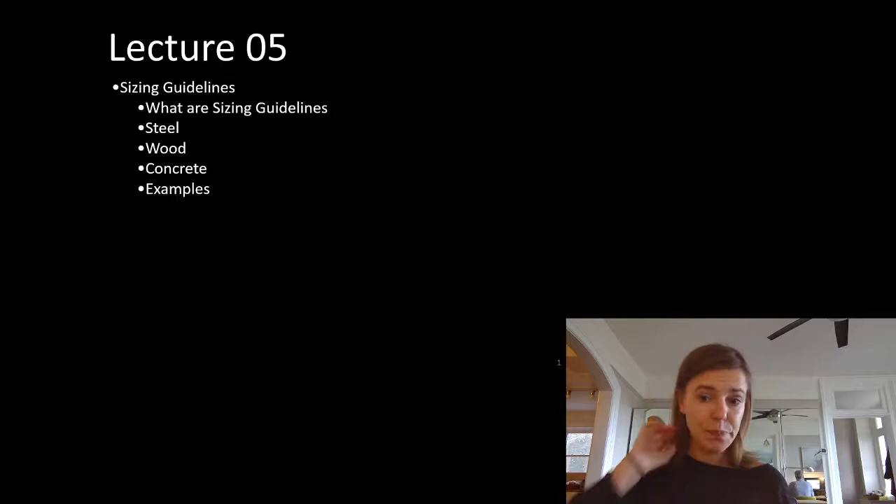This week we're using sizing guidelines. You might hear people refer to them as rules of thumb—that's what most engineers call them, that's what the industry calls them. One year I had students write in a review that I supported domestic abuse because I called them rules of thumb, since they'd heard that term meant something explicit. That is not true—it's an urban legend not substantiated in fact in any way. That said, it made me cry, so rather than deal with that every year, I decided to just call them sizing guidelines. The difficulty is you're going to hear everyone else in the industry call them rules of thumb, so I can't gloss over that fact, but we will refer to them as sizing guidelines here.

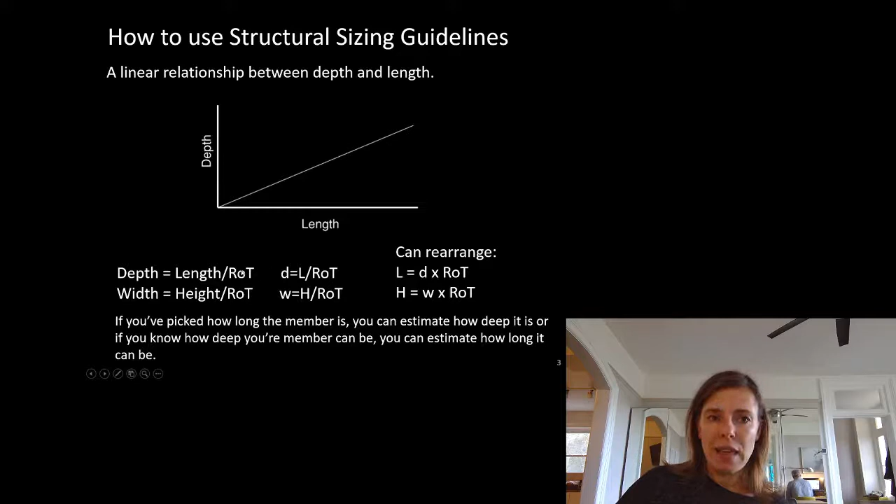We're going to calculate next term that it's not a linear relationship between depth and length. But for our sizing guidelines, it lets us put something on with very quick calculations without having to go through in-depth structural analysis. The idea is that if you know the length of your member or beam, you'll be given a rule of thumb or sizing guideline—you'll see me often write ROT as a placeholder. You take the length, divide it by your sizing guideline, and it tells you the approximate depth that would be good for that beam.

That means you can rearrange that. If you know you have a maximum ceiling height that you can fit your beam into, you can figure out the maximum length your beam could possibly be based on very preliminary information. For width, that's the height of the element divided by the sizing guideline—this would be for columns and walls. Thinking about it in the opposite way, if you know what the width is, say you could only have a 290 block wall, you could multiply it by your sizing guideline and figure out the maximum height that thing could be.

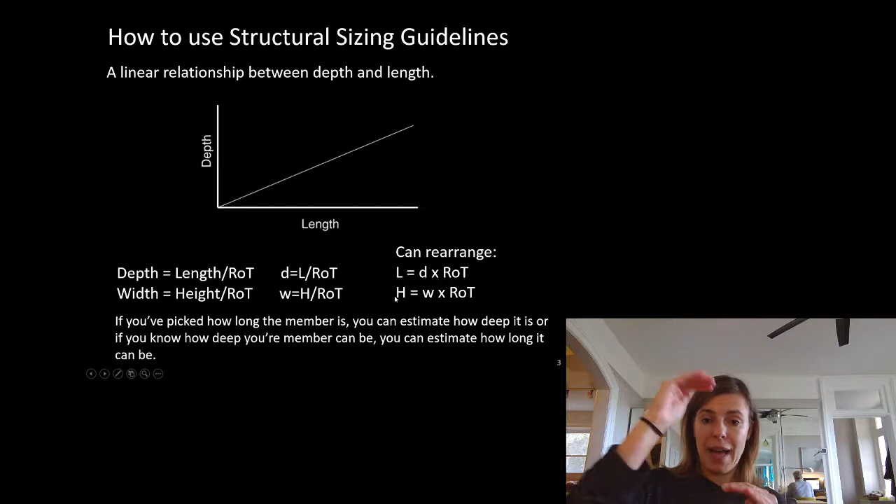So if you've picked how long the member is based on your layout, you can estimate how deep it needs to be. If you know how deep your member can be because you have a limited ceiling height, you can estimate how long it can be.

So when can you use your sizing guidelines? Well, they'll be close to the final design member when they're within the range of normal applications. This assumes things are relatively standard—if you're talking about a steel building, you're talking about a relatively normal steel building. If you're talking about a wood house, a relatively normal wood house. If you're talking about a concrete building, a relatively normal condo or office building.

These might not be the estimates for you if you have really large loads, or if you're spanning extra long distances. Remember, next term we're going to prove it's not a linear relationship between depth and length. If we're assuming it is, when we get into extra long lengths, these sizing guidelines might not be good enough for us.

If you're using a weird layout, something different than what you'd see in a standard layout, that could have an implication on these sizing guidelines. If you have large transfers—something big coming down a whole building and then it stops and has a transfer—that could make a change.

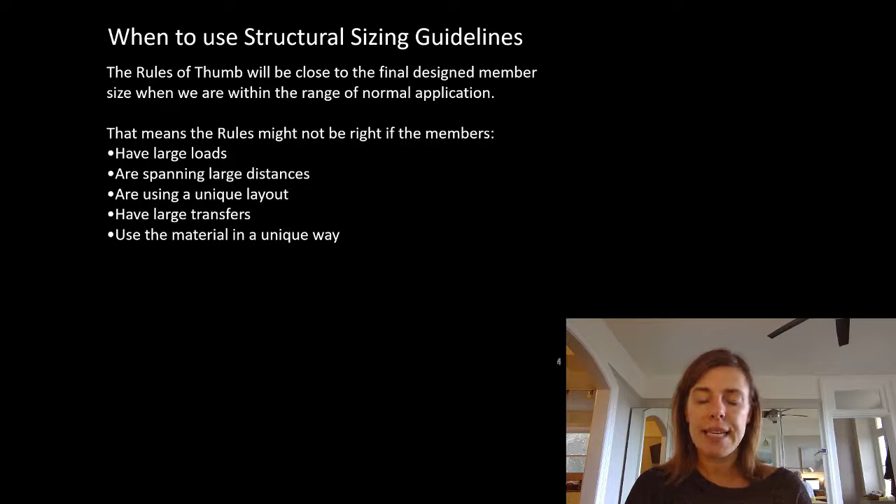If you go into your downloads or helpful downloads module, you will find a file called sizing guidelines. In that, there is a separate page specifically for mass timber.

So as we introduce each one, I'm going to remind you what each thing kind of looks like. We've already talked about these materials, so you have a good idea. I'll also usually provide you with what is kind of the normal range of products of that material.

Sorry, I'm freezing. I'm just going to grab a blanket and put it on my lap here.

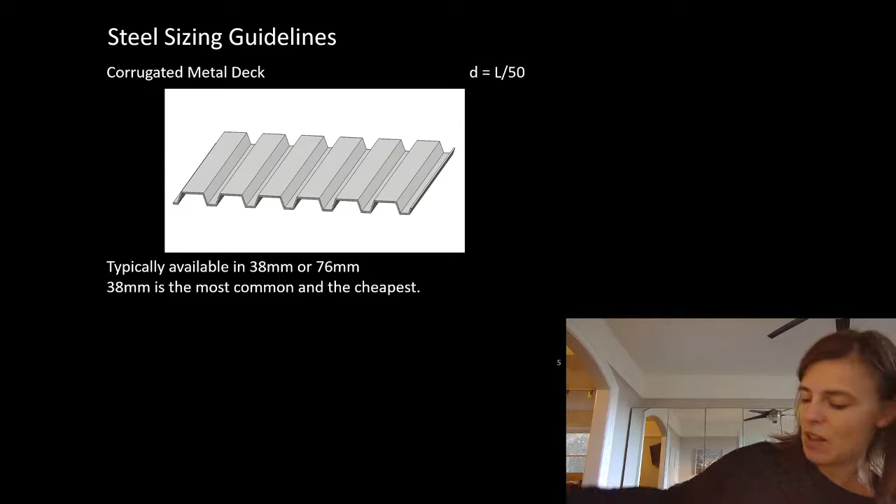So the first one we're going to talk about is corrugated metal deck. Remember, our corrugated metal deck spans from joist to joist, or purlin to purlin, or purlin to joist. But it is spanning a relatively short distance, and it is our surface. It is what provides our enclosure, essentially.

We will put our roofing or our floor on it. If it's metal deck, it's probably roofing. Maybe if it's a house, they might do plywood on top of the metal deck and do the roofing that way. If it's a floor, they might put plywood on it and do a floor that way. But normally if it's a floor, it's concrete on metal deck.

So the sizing guideline for corrugated metal deck, which we often just call metal deck, the depth based on the sizing guideline is the length it's spanning divided by 50. Now this is talking about how far apart the supports are. A piece of metal deck can come in a very long strip, but what we're talking about is how far it spans. And it only spans a relatively short distance because we've got joists or purlins at some regular spacing picking up that metal deck. Typically, it's available in...

It's typically available in 38 millimeters or 76 millimeters deep. It is most common to use 38 millimeters. I often see, when we get into the projects in second term for studio, students again and again picking 76 millimeter metal deck for no reason that I can figure out. I can't see the reason why.

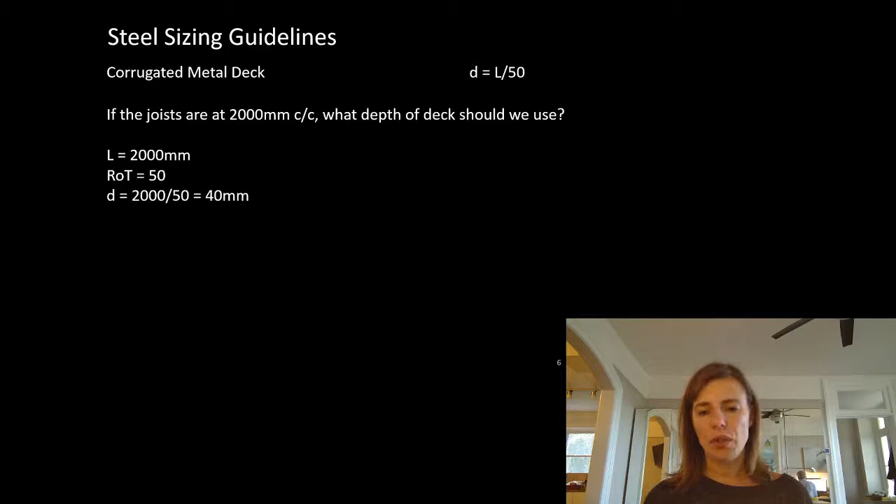So if our joists or purlins are at 2 meters on center, what depth deck should we use? Well, we know our sizing guideline is L divided by 50, and since our deck is spanning from joist to joist and they're 2 meters apart, the length our deck is spanning is 2 meters. So our depth will be 2,000 divided by 50, which works out to 40 millimeters—pretty darn close to 38 millimeters. I would always say don't round down, but 2 millimeters in this instance, we can use our 38 metal deck. So we would probably put 38 metal deck on our drawings for this.

So the deck comes in 38 and 76, which I already said. The 38 is very close to 40 millimeters, so we should use the 38 millimeter corrugated deck most of the time. This, of course, means that whatever supports the deck would often be 2 meters apart at a maximum. So if you know that 38 metal deck is the cheapest system for your entire building, that means whatever supports it is going to want to be every 2 meters.

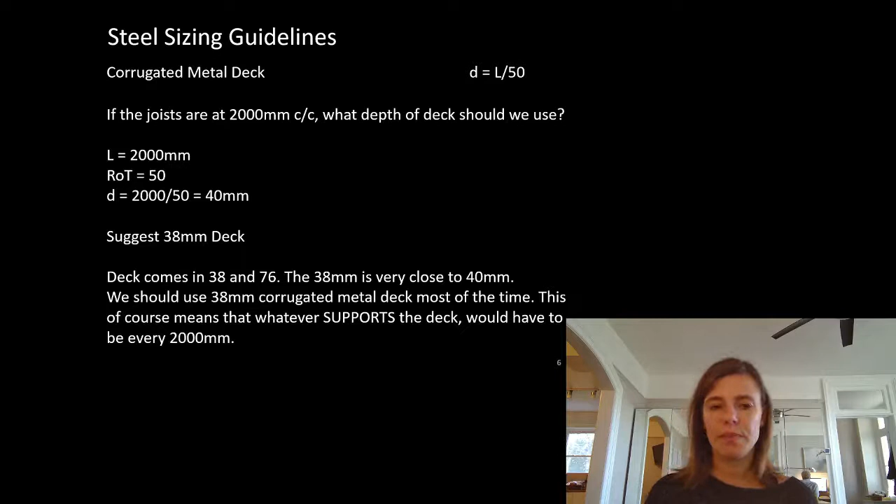The sizing guideline is depth equals length divided by 20. Again, length here is how far the deck is spanning. The most common assembly for our concrete on metal deck is 64 millimeters of concrete on 38 millimeters of metal deck. This is using normal density concrete.

The only reason I'm saying that so explicitly is because when you look at the dead load list, it has ND written for the concrete, but that's saying normal density. Normal means it's the normal thing to do, and it is what's done the majority of the time. So 64 concrete on 38 metal deck - this does not mean what you might think. I'll show you exactly what that means.

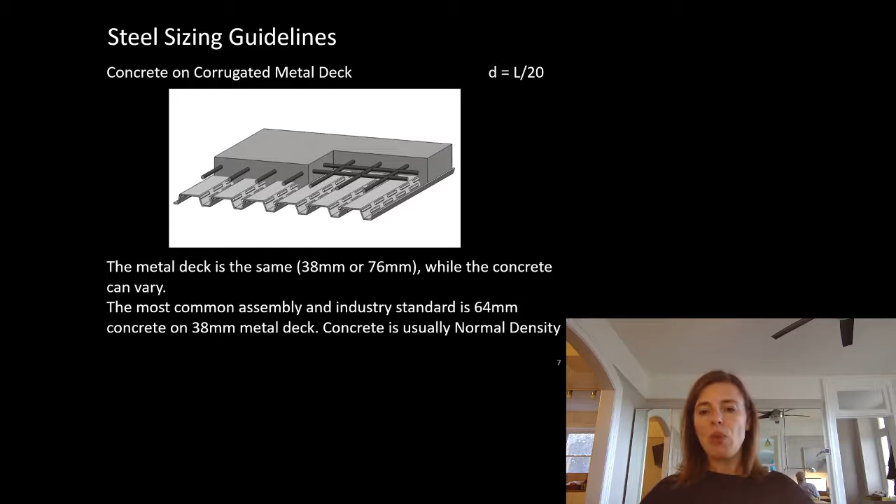This is where, when we start talking about dead loads next week, don't start from basic principles and try to figure out the volume of the concrete. You will be given how much that weighs. So don't worry about that next week. You'll be given that information, but you don't need to go calculate the volume of concrete for this.

So if our joists are at 2 meters center to center, what depth of concrete on metal deck should we use? Well, 2,000 divided by 20 equals 100 millimeters, which is pretty darn close to our 102 millimeters for our 64 concrete on 38 metal deck.

So why would the concrete on metal deck span the same distance as the metal deck? The concrete on metal deck should be much stronger. Why would we span them the same distance? Well, this is where knowing what the application is is really important. The flooring usually has a higher cumulative load on it than the roof. The roof, with its lower load, can have the weaker material spanning the exact same distance as the higher load on the stronger material. So they would work out to be able to span the same distance.

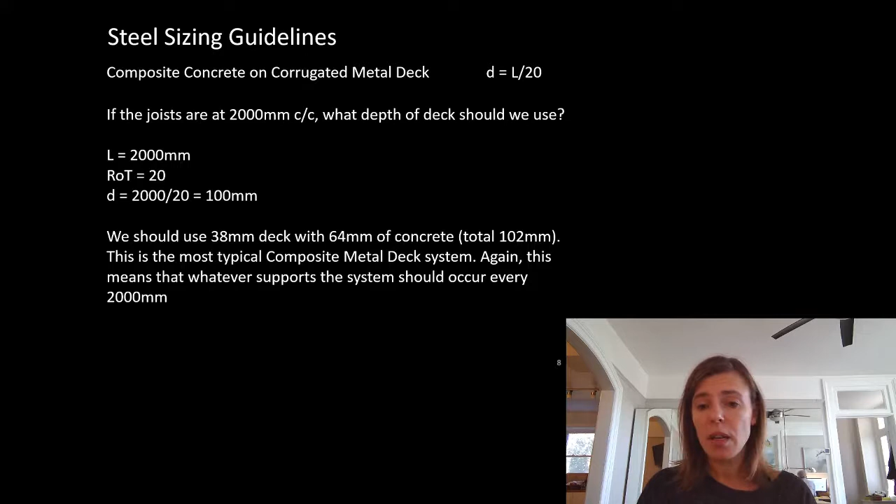So again, if 102 millimeters is our most common assembly, 102 times 20 gives us about 2 meters, which is a pretty darn good system for our joists. 2 meters or less for concrete on metal deck or metal deck is where our joists or purlins need to be. That's just ubiquitous - 2 meters or less. That's where you're going to start. That's what you're going to draw again and again and again.

So our open web steel joists - these are the things that are picking up our metal deck or our concrete on metal deck. Now, we've already said that what's normal is for our deck to span 2 meters. Doesn't matter if it's concrete on metal deck or metal deck, it's spanning 2 meters. Our joists then need to be at every 2 meters or less. That is going to be the standard.

There are definitely going to be instances where that is not the case. For sure it is. But we're talking about the normal boring stuff, and the normal boring stuff, they're going to be every 2 meters.

They typically come in 2-inch increments. We're going to work in metric and say 50 millimeter increments. So if I ask you how deep an open web steel joist should be for a particular length, I don't want the exact calculation - I want the exact calculation rounded up to the next nearest 50 millimeters.

So if your calculation is 380 millimeters, I want 400. If you went down to 350 millimeters, you're giving me something shallower than the minimum recommended depth. You wouldn't want to do that. You could in the final design make that call, but you wouldn't want to do that right now and then get a nasty surprise when the engineer comes in and does the final design and says, whoa, whoa, whoa, you need a 400 millimeter deep open web steel joist. You haven't left yourself room for that. Now you're going to have deeper ceilings than what you've drawn.

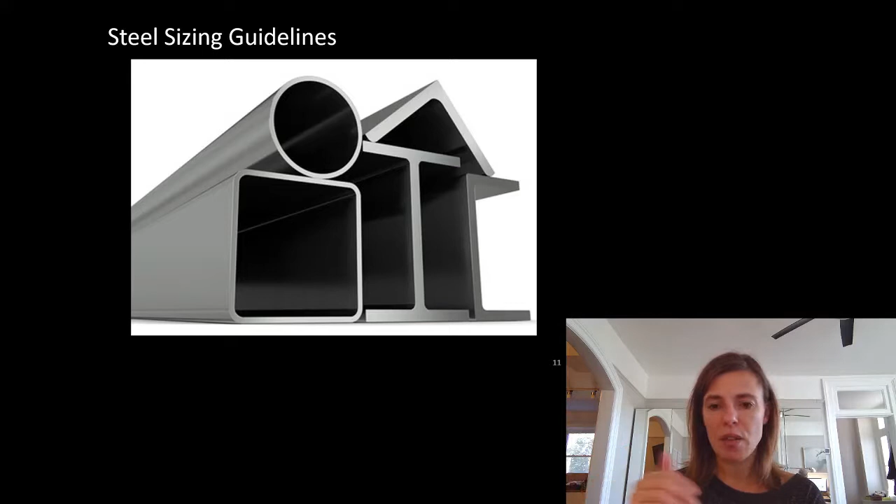So here are normal sizes that are available in these sections. A W section would be W and then something suggesting the depth. Now, the depths are not exact - these are not the exact final depth of these members. A W410 is not exactly 410 millimeters deep. But since our sizing guidelines are kind of approximate, it's a pretty good place to start with our drawings.

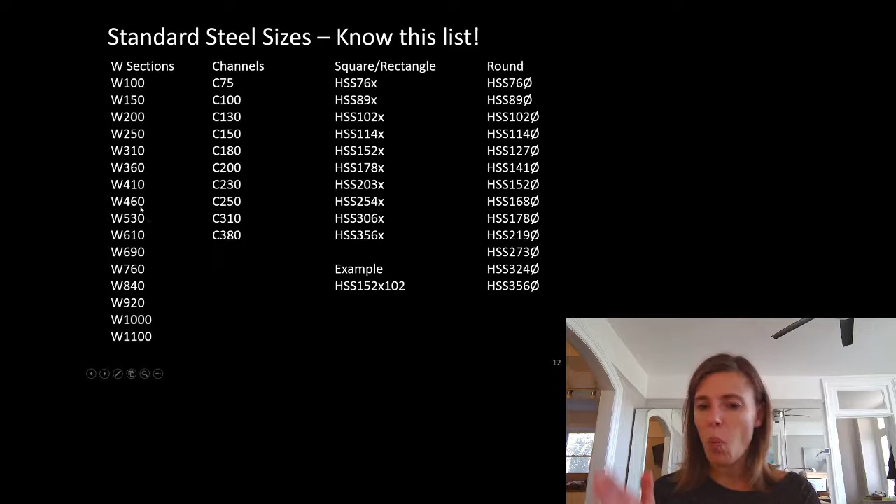Channels, same thing, approximate depth. If you look them up in the code, you will see that there's another number here. It would be W100 by 19, for example. That second number would be the weight per linear meter of the element. We're going to talk about that next term. Channels, same thing - the second number would be the weight. So you could tell at a glance, comparatively, how much they weigh. And weight is our direct association with cost.

HSSs, which are elements that we take flat steel and kind of fold them or roll them into the shape we want, not heat it up to make the shape we want. They give us exact dimensions, but they don't tell us anything about the weight. So it's not as obvious to tell at a glance what the relative cost is of these.

So do you remember when we talked about tributary areas and tributary widths? I talked a lot about the difference between a river and a brook and a creek, and how if you came across them in the woods, they're all rivers. It's only when we're trying to categorize them that there is any meaning associated with these things. That applies for us right now.

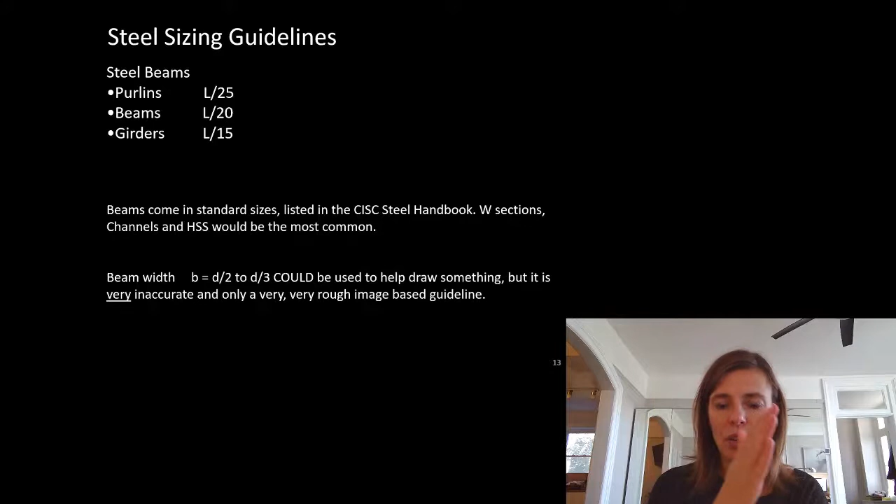Steel beams are steel beams. Whether we're calling them a purlin or a beam or a girder is to just help us in our mind figure out what their hierarchy is. A purlin is a beam that is not doing that much work. It is usually just picking up concrete on metal deck or metal deck, and it is usually at 2 meters on center. So it's a relatively lightly working element.

Our beams are usually the element that are picking up the purlins. So we wouldn't know the exact spacing of those because they'd be dependent on the length of our purlins. And then a girder is a beam that's doing an extra hard job.

We don't always know what that extra hard job is. Maybe we know that there's really high loads in that zone. Maybe it's picking up a transfer, whether it's supporting another beam or a column above.

I've had students in the past say, well, I sized it like a girder the way you said, but it was too deep of a beam for me, so I'm going to call it a beam. Well, the problem there is now you haven't left enough depth for your element. Calling it a purlin or a beam or a girder isn't going to change the final math in the design.

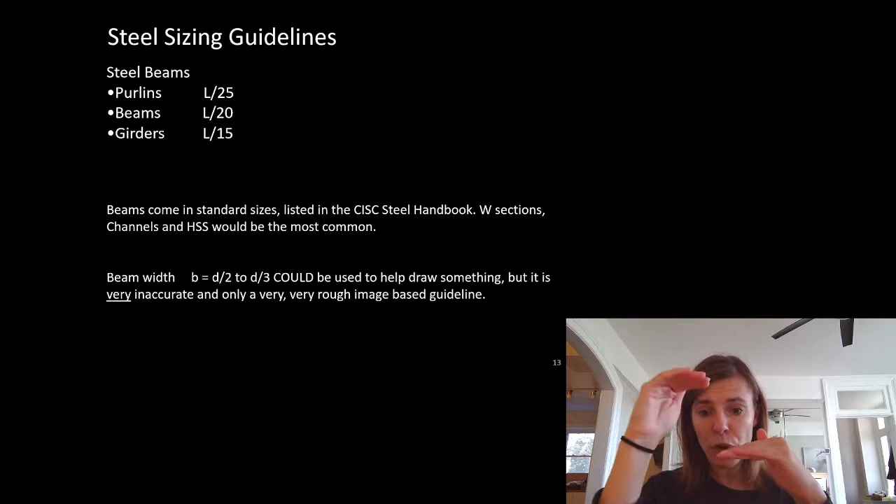And if you called what you can clearly recognize should be a girder a beam and sized it accordingly, you're going to end up with a beam that's not this deep, but this deep in your preliminary sizing. And then when you do your final design, you're going to find out that you do in fact need a beam this deep. And if you're telling your client you only need this much room, it's going to be a nasty surprise that you need more depth.

So always be conservative here. If you see a beam doing something weird, call it a girder. It's only going to give you a nice safe buffer in the end.

So our beams, and remember a beam is a purlin, a beam, or a girder, come in standard sizes listed in the CISC Steel Handbook. That list is the list that I showed you on the previous page. The W sections, the channels, and the HSSs would be the most common.

There is a sizing guideline chart that tells you a width of 1/2 to 1/3 of the depth could be used. I hate the width sizing guidelines because they're absolute crap. The width varies greatly even within depths of a particular type of beam, to the point that I'm not going to ask you a width for any of these things for our steel beams, just because they have almost no relationship the way some of the other beams might possibly have.

You don't need to worry about the width for the steel beam, but it might come in handy if you're not picking a real beam and you just want to draw something. Drawing it to 1/2 to 1/3 of the depth for the width, you'd probably have a pretty good drawing, but it would give you no kind of real information.

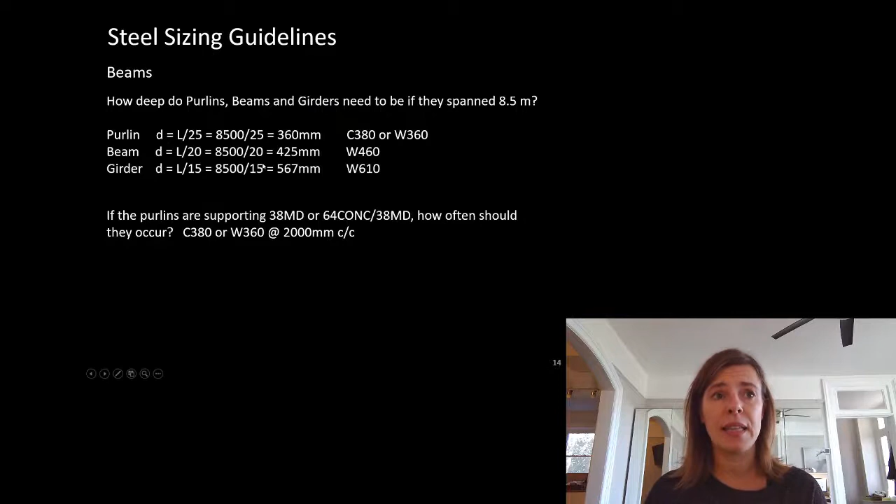The beam would probably be a girder, so we'd probably be comparing these trusses to a girder. If we looked at our girder sizing guidelines, it was L divided by 15. Our truss is going to be L divided by 12. So that means if they're both in the exact same spot, if we switch from a girder to a truss, it's going to be deeper, but it's deeper with all of these voids in it.

So these would be custom made by the fabricator. Often the base building engineer might get involved in the design of these, at least for a preliminary design—the fabricator would be designing the connections. These ones, you could very explicitly go to a custom depth. Like if the calculation needed to be 935 millimeters deep, we could make it 935 millimeters deep. If we had no real constraints though, we'd probably still kind of keep it to 50 millimeter increments.

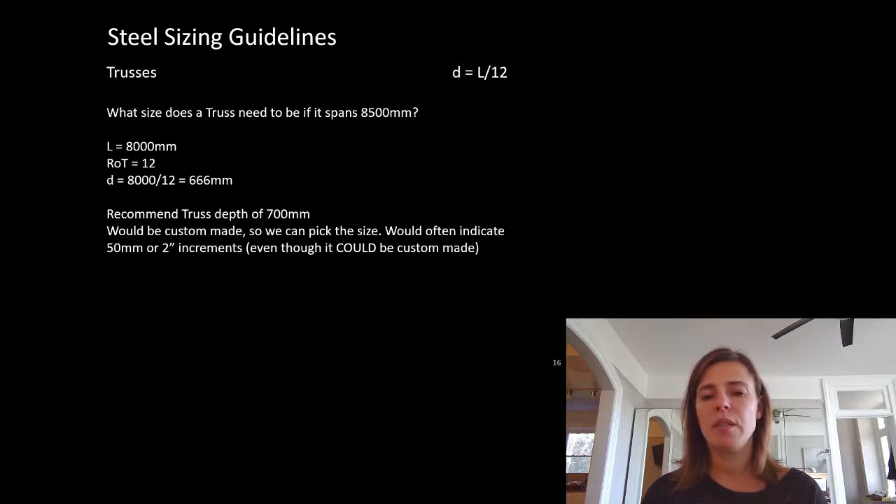So how deep would a truss need to be if it spans 8.5 meters? We'd take 8,000 divided by 12 and we get 666 millimeters deep. I'd probably recommend a 700 millimeter deep truss. If this was a very refined, high end, high profile design, we might later in the project look at refining it to something very specific. But at this point, I would probably round up to the nearest 2-inch increment, or 50 millimeter increment.

Let's talk about our columns. The sizing guideline for columns is H divided by 40 to H divided by 20. We're going to stick to the H divided by 20 rule here because we're talking mostly about short columns. The standard sizes are the same ones we'd be looking at—W sections, HSSs for this. We wouldn't use angles or channels for columns. So we'd be sticking to our round HSS, rectangular or square HSS, or our W section. We'd go back to that same list I showed you to pick from.

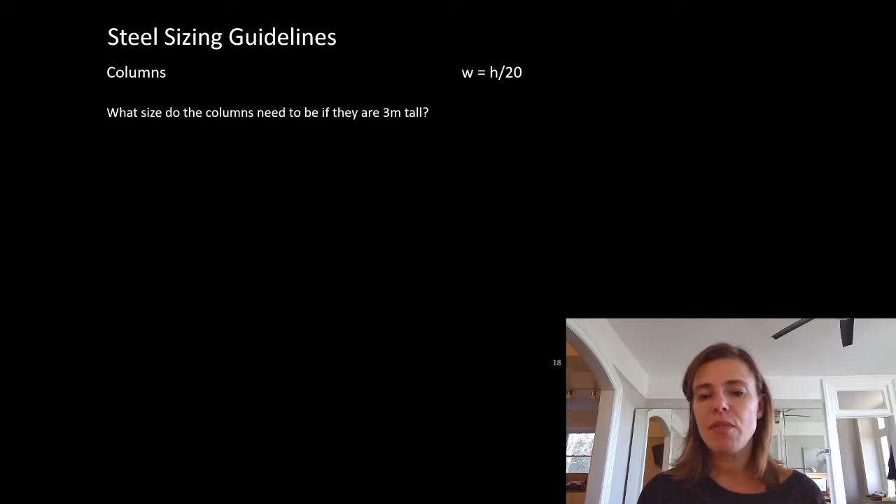So what size do the columns need to be if they're 3 meters tall? Well, this is a short column, and I've told you to stick to the H divided by 20 range, so it would be 3,000 divided by 20, or 150 millimeters. So if I was going to pick something for this, I would say a W150, or an HSS 152 by 152, or a round HSS that's 152 millimeters in diameter.

So we want to size the concrete on metal deck. They've told us that this second floor is a floor, in fact—the 2 is just context, usually that's the context for a second floor beam, second floor deck.

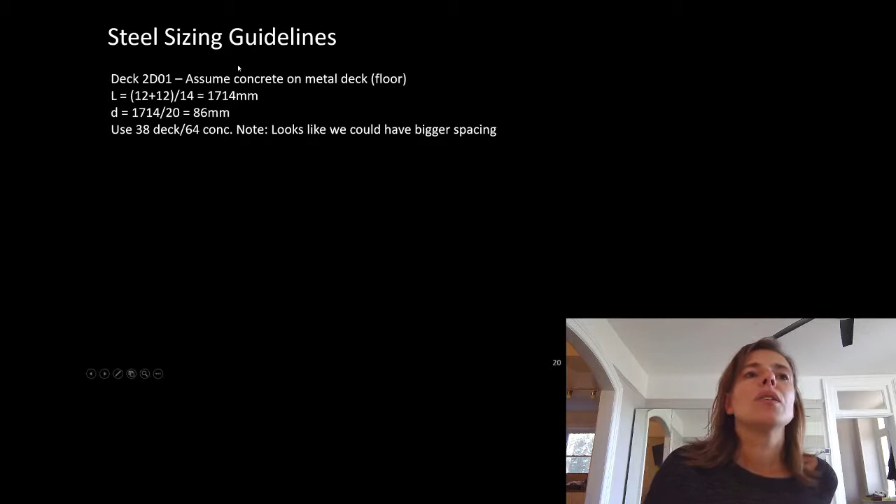24 divided by 13, let's fix that right now. I'm going to fix that while I'm talking to you guys, if my computer wants to behave. All right, let's take a look at this right now. This should be 13. 24, 1846 millimeters. 1846. One 846 divided by 20. All right, just wanted to fix that right now while I had it here.

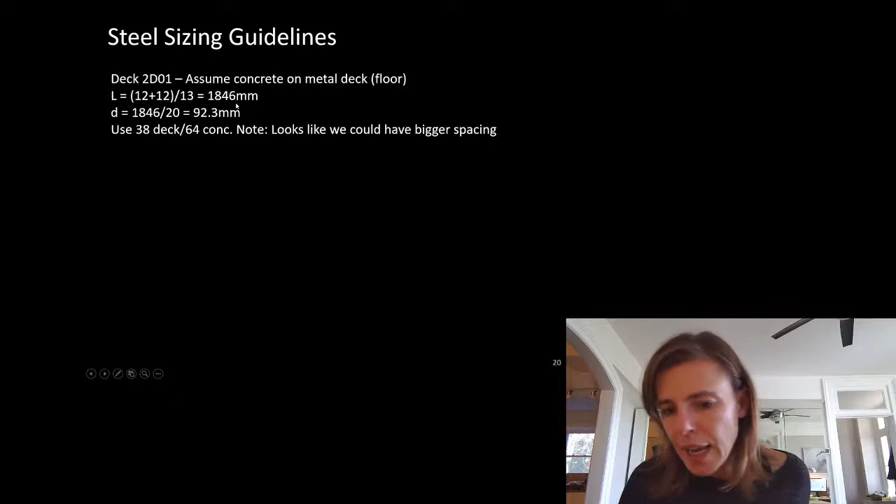So we saw that the full length of that was 24 meters, but there was a support every some distance, and there was 13 of those. So 24 divided by 13 gives us 1846. So that's how far our deck is spanning. It has a support every 1.846 meters. To figure out what depth we need, we have 1846 divided by 20, since the sizing guideline for concrete on metal deck is L divided by 20. We do that math and we get that we need something that is 92.3 millimeters deep. Well, 38 deck supporting 64 concrete, we know is industry standard.

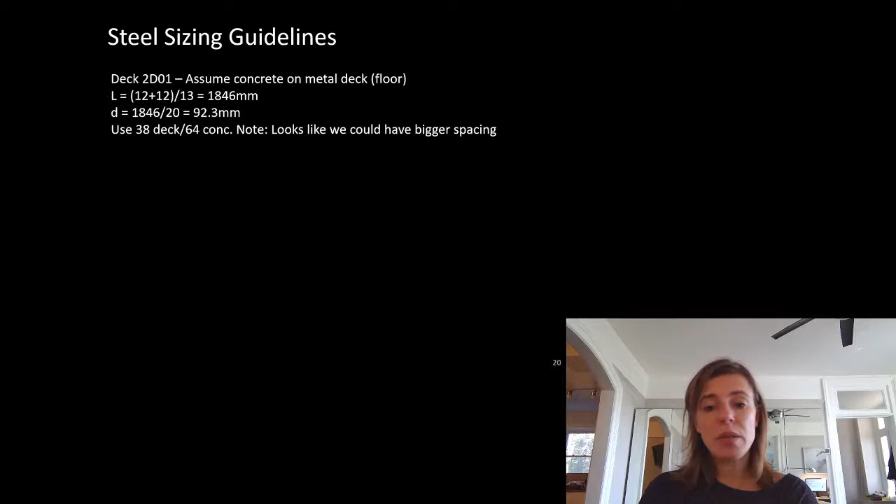It looks like maybe we could have spaced our joists a little bit more. Maybe we know something about this system, that there's heavier loads. I don't know, maybe this worked really well for the layout. But it works within our range, and it's pretty close. 102 is the total depth of our 38 deck, 64 concrete. So it seems like a really good choice.

Joist 2J01 was spanning 8 meters. So we have something that is 8 meters long. It is about 2 meters on center. It's actually 1.846 meters on center, but we know that's pretty close to our 2 meters on center. So it seems like our sizing guideline is still a good choice, it's not doing something weird. So we take our 8 meters and divide it by 16, giving us 500 millimeters. So it seems like a really good choice would be a 500 millimeter deep open web steel joist.

Okay, so 500 millimeter open web steel joist seems like a really good choice there.

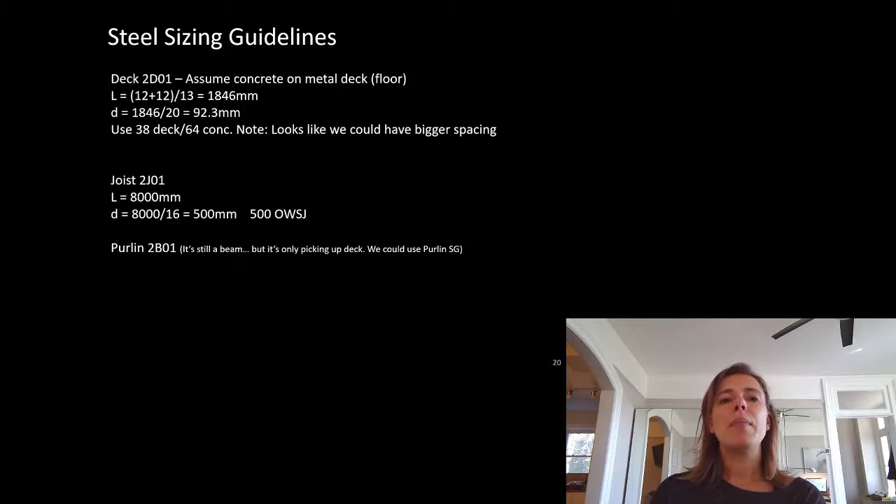Let's talk about purlin 2B01. It was at the exact same spacing as our joists. Remember, joists and purlins can be interchanged, they have different sizing guidelines, so you need to pay attention. A purlin is still a beam, so calling it 2B01 is totally normal, but looking at the plan, we can recognize that it is doing the job of a purlin, so we can be a little bit loose on our sizing guideline. We can go with the lighter criteria, the purlin one. It's only picking up deck, and it appears to be about every 2 meters. So our 8 meters divided by 25 is going to give us 320.

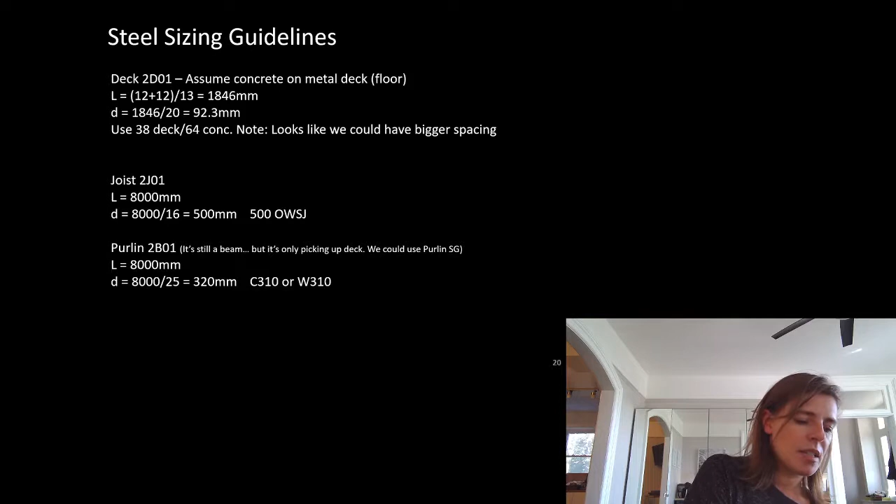I actually don't like this one, we're going to change this. 2B01, I'm going to change this to a C that works and a W that works. I had a different number here previously, so I'm going to fix this little typo right here, right now. Let's just go back and take a look at what we had here. We could have a C380 or we could have a W360. So I'm going to update that right now while I have the opportunity.

A good choice for our purlin would be a C380 or a W360, again at 2 meters on center. So for the same span, the purlin and the open web steel joists are shallower than the open web steel joist option, but they probably end up being a heavier system. So there's a payoff there. If you want the shallower system, go with the purlin, but understand that it might be a little more expensive.

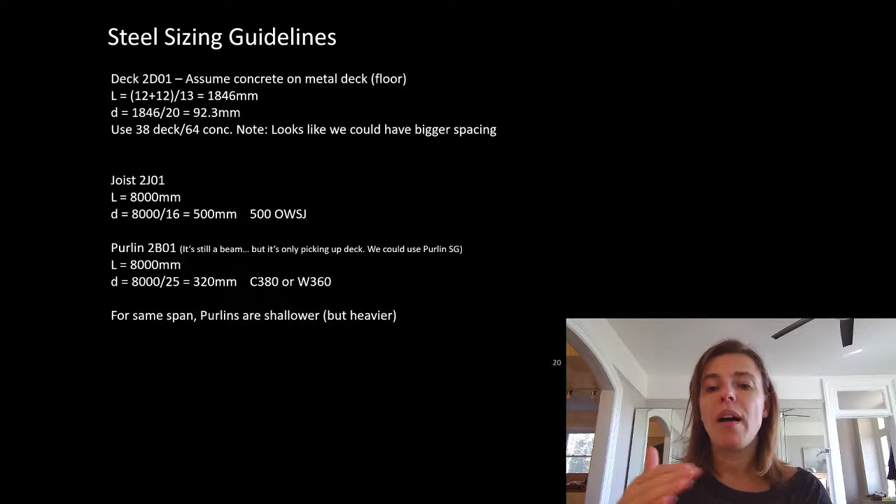Joists become cheap when you have a lot of them and they're repetitive. If you only have 3 or 4, the purlin is definitely the way to go.

So beam 2B02, that was our beam that spanned 12 meters and was picking up our purlins. That was the one spanning from C01 to C02 and C02 to C01. Our beam sizing guideline seems to be the appropriate choice because it is supporting purlins, which we've said is typically what a beam would do.

If we use the purlin sizing guideline, we'd get a shallower beam as our answer, and then we could get a nasty surprise when we go and do our final design to find out we should have guessed that there was a deeper member.

So our length is 12 meters. Yeah, 12 meters. Our sizing guideline is L divided by 20, or 12,000 divided by 20 gives us 600. So we should use something that's greater than 600 millimeters deep. If we go back and look at that list, a W610 seems like a really good choice.

If we had used the purlin sizing guideline, we would have gotten something shallower, and we would have been unpleasantly surprised in the design.

Now 2B03, we talked about already and said that it seems to be spanning a really far distance. Let's go ahead and call that one a girder. It's also got a transfer coming down on it. So something that seems to be doing an extra big job, we'll use the girder sizing guideline. Its full length was 24 meters or 24,000 millimeters. Our sizing guideline is 15, and we get that it needs to be 1,600.

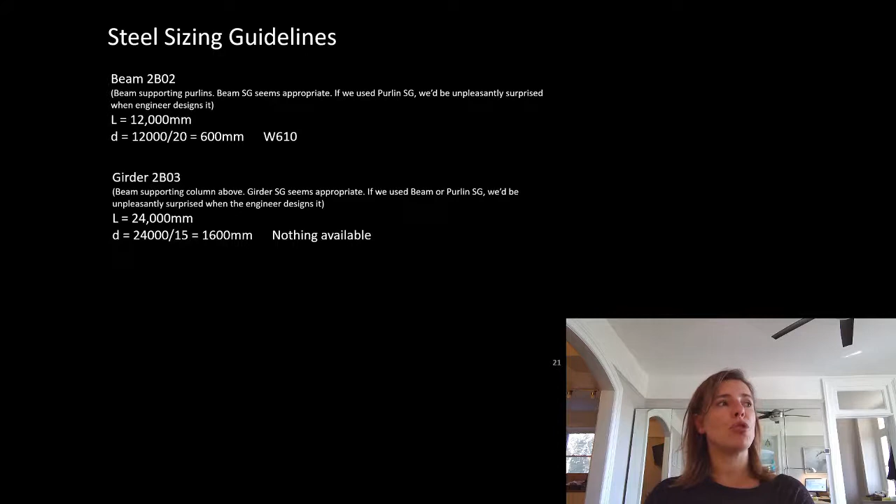Let's take a look if 2B03 was a truss. So our length is still 24 meters, but our sizing guideline is L divided by 12 now, and we would get that we could do a custom 2-meter deep truss in that position.

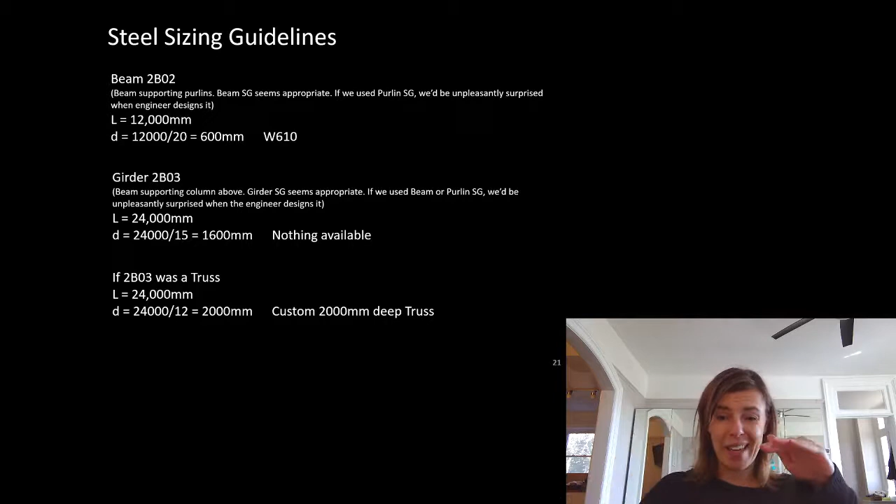So this is where knowing what your floor-to-floor height is becomes really important. If our floor-to-floor height is not very high, that either wants to be at a perimeter wall or embedded in a partition wall, because that's going to be 2 meters deep. If our floor-to-floor height is only 3 meters, we've only got a meter of clearance, and there's not many people, maybe my kids, could fit under a meter clearance.

So let's take a look at our column, C01. Well, they did tell us that our floor-to-floor height was 3.2 meters, so that only leaves 1.2 meters for that truss that we designed. But maybe that's the outside edge of the building. We don't know what the context was. In fact, they drew it with a dotted line around it, so that could have been the outside perimeter of the building.

Our sizing guideline is H divided by 20. When we calculate 3.2 meters divided by 20, we get 160 millimeters. We want to make sure we give ourselves a nice little buffer here, so we might bump that up and say that we should use an HSS 203 by 203.

Column C02. Exact same. Well, if we looked at those, C01 and C02 weren't doing the same job. C02 looked like it was picking up twice the tributary area as C01. So this is where it's really apparent that our sizing guidelines, while excellent and helping us out, actually aren't perfect. We can see that this tells us these need to be the exact same thing, but when we do the final design, we can see that one of them is going to actually need twice as much capacity as the other.

We're not really sure how that comes into play. Is that just about making it bigger? Could we fill it solid? We're going to talk about all of those things next term.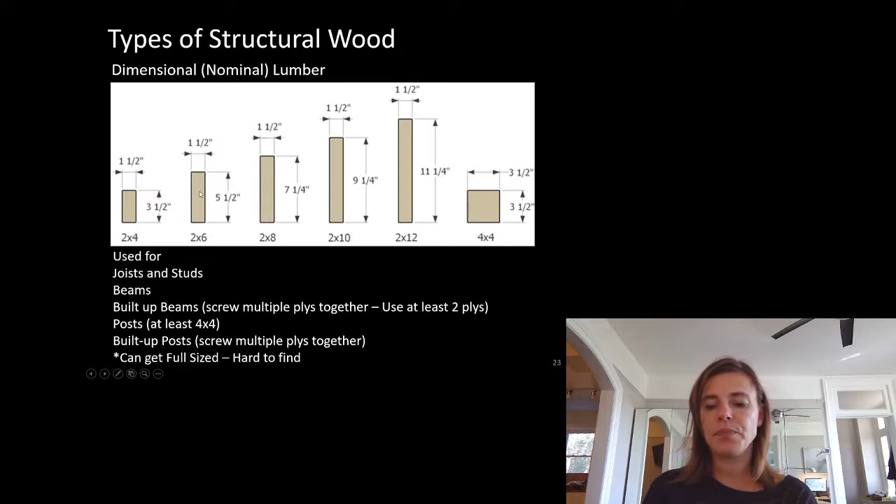Plywood is something that comes in 4x8 sheets. Those are 4 feet by 8 feet sheets. You can get them bigger. They're a pain in the butt to move around. I know when I try to load, if I have to go buy plywood, I can't do it on a windy day because I do not have the strength to move it around in the Home Depot parking lot in a full-on gust of wind.

It comes in a range of thicknesses, but the ones we're going to be talking about structurally would be 1/2 inch and 3/4 of an inch. We might structurally use 5/8, 7/8, or 1 inch, but that would be when our normal things don't work. And what we're talking about today is normal things.

I-joists are a proprietary system. They're designed by the fabricator, and they really are just a bunch of wood shavings glued together in chunks of wood, top and bottom, where they're glued together. The depth would be sized using preliminary sizing. Sometimes maybe we'd use a design aid to figure out what depth they would need to be to go on the drawing. But the final number that gets signed and stamped with an engineering stamp would be by the supplier.

These we would put in instead of our wood joists. Now, we wouldn't start with these. This isn't typically where we'd start. The cheapest thing in wood is going to be using nominal lumber, or a 2x4, 2x6, 2x8, 2x10. Even going to a deeper system, it's often cheaper to stick to the lumber.

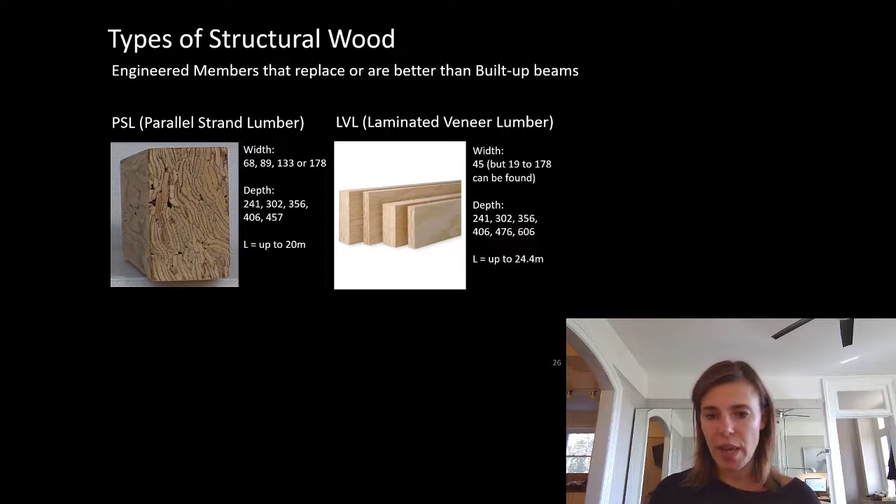So it really has to do with comfort level, how they source it, where they source it. Even geographical locations can make a slight difference in it. But knowing who the contractor is can really help that process. I would say it doesn't really matter, except that there are slight differences in their properties.

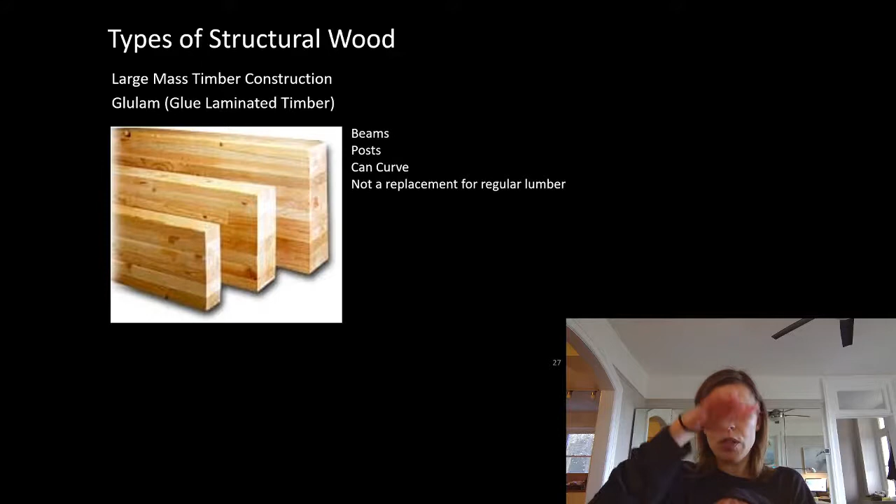Mass timber, so we're getting into the big elements here. Mass timber is when we take our 2x4s, 2x6s, 2x8s, and stack them on top of each other and glue them together. That would be our glulam, for example. So we're making a big rectangular beam by gluing a series of smaller elements together.

This isn't something we use just to toss into a drawing instead of regular lumber. This would be a very thoughtful thing we would do. Either it's a showpiece, or because the demands on it are real, and we're probably doing mass timber as a design aesthetic or a design choice for a larger building.

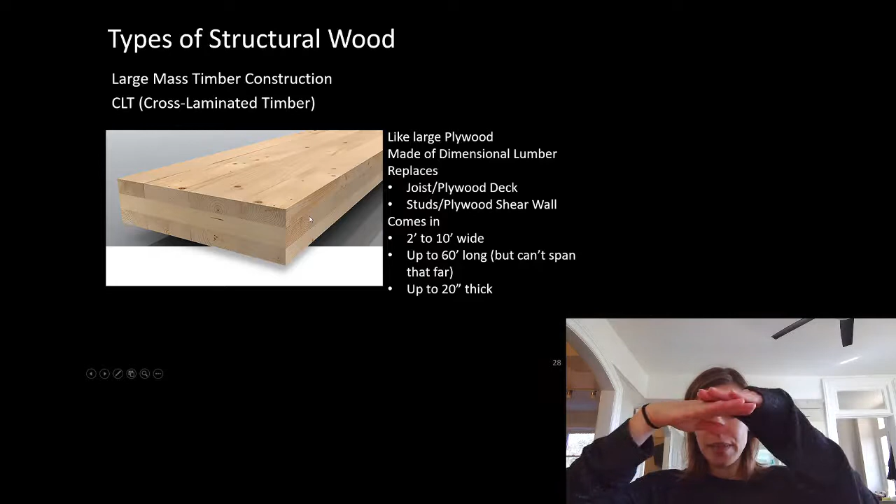CLT, this is when we're gluing elements of lumber together to make panels. We often make 5 to 7, we can make 3, 5, 7 thick panels deep. This would replace our joist and plywood deck system or our stud and plywood shear walls. They come 2 feet to 10 feet in width, and they can come up to 60 feet long.

That does not mean that we can make it span 60 feet. It would need intermediate supports in there, but you can build it to be a 60-foot long piece.

So the sizing guidelines for plywood, I don't care what the sizing guidelines are. It's typically 16 inches center to center for joist spacing, so our plywood can span 16 inches. Our roof and walls are relatively lightly loaded, so our 1/2 inch plywood can span 16 inches. And for floors where we've got higher loads, our 3/4 inch is going to span our 16 inches. That means our joists and our studs are going to be 16 inches on center.

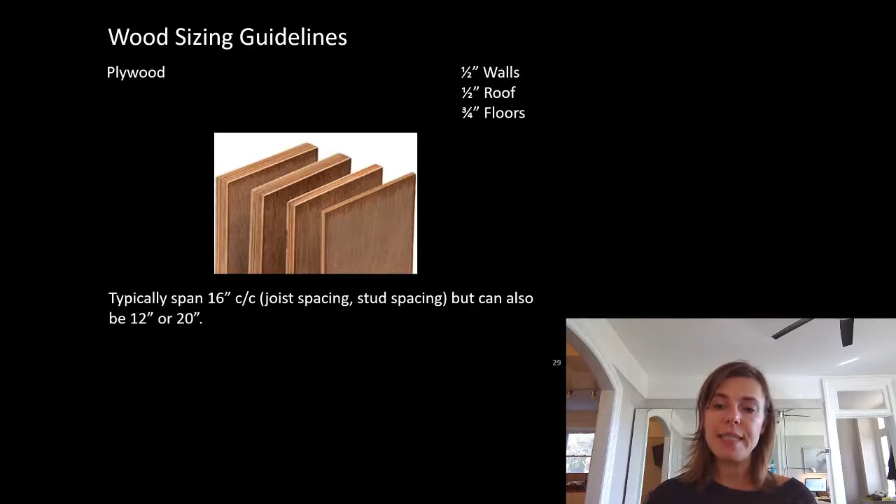In specific loading conditions, we can do 12 inches or 20 inches. I've even seen 8 and 24 inches, but those are thoroughly designed. That is not something we toss on the drawings at a preliminary design stage without very thoughtful consideration.

Tongue and groove deck is something we might do to replace metal deck if we were in a bigger style system. This means it would be something spanning from purlin to purlin or open web steel joist to open web steel joist, not our wood joists anymore. This would be used in our kind of bigger systems. You often see them in pool areas because the metal deck has a tendency to rust.

And the wood holds up really well. Even though it's a wet environment and that can impact the strength of wood, it holds up better in that moist environment than the steel deck does.

The 38 millimeters seems like a funny number to make our metal deck when we could have made it whatever we wanted. The wood, our tongue and groove, was the normal thing in the industry. When metal deck came along, it was to say, we can replace your tongue and groove. So it wasn't that tongue and groove is replacing metal deck, our metal deck started replacing our tongue and groove because it was able to span just a little bit farther.

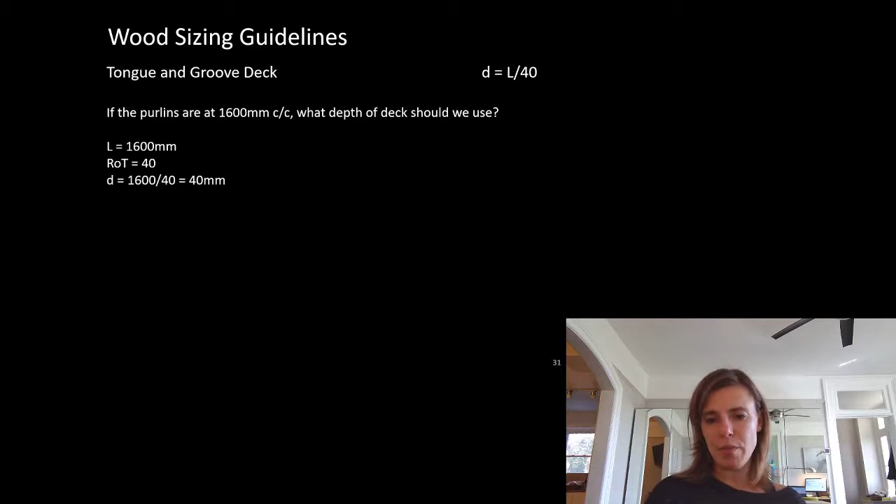So if we had an example where it was 1.6 meters span, or we had joists or purlins every 1.6 meters, our sizing guidelines would tell us that our tongue and groove deck would need to be about 40 millimeters thick. That works out perfect because the most common is 38 millimeters deep. That also tells us that if we're using tongue and groove deck, our support system needs to be about every 1.6 meters. Remember, if it was metal deck for the same depth, we could span up to 2 meters.

So wood joists. These elements here would be every 16 inches on center. Standard wood sizes are 38 or 89 millimeters wide, but 38 is normal. 4 inches, which is 3.5 really. 140, which is our 2x6. 184, which is our 2x8, 2x10, 2x12 deep. Remember, those are then shaved down to match these dimensions.

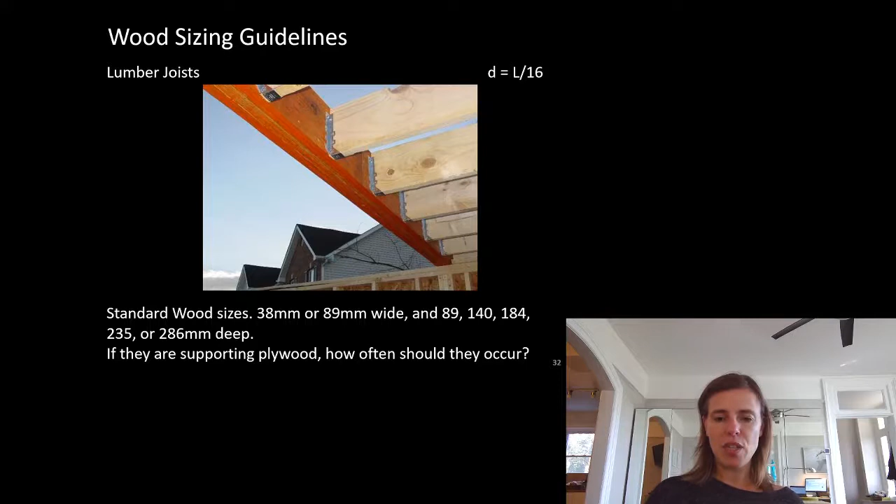If these are supporting plywood, how often should they occur? We know that they should be every 16 inches on center because our plywood spans about 16 inches. And we're talking about normal stuff here, not fancy outside the box stuff. Our plywood spans about 16 inches, therefore we need a joist roughly every 16 inches.

So how deep should our joists be if they're spanning 3 meters? We can assume that they're also happening every 16 inches. So 3 meters divided by 16, which is our joist sizing guideline, is going to give us 188.

I don't like sizing down, and I thought I went through and kind of finagled all of these things. But you know what, I'm going to give us 4 millimeters. 4 millimeters is almost within kind of tolerance errors and things like that. And these are our preliminary sizing guidelines. But I'm only just making this decision, I'm running a risky game here. If I went through and finally designed this and found that a 2x8 wasn't going to work and I needed 2x10s, that's a big difference on the project.

So I want to be really smart about making this choice. I'm going to say that maybe I know something about this project and it's on the lighter side of normal, and I'm going to go with the 2x8s.

So again, if they're supporting plywood, how often should they occur? We know that the plywood can span 16 inches, so we should have these every 16 inches. So 2x8s at 16 inches on center, or a 38 by 184 at 400 millimeters center to center.

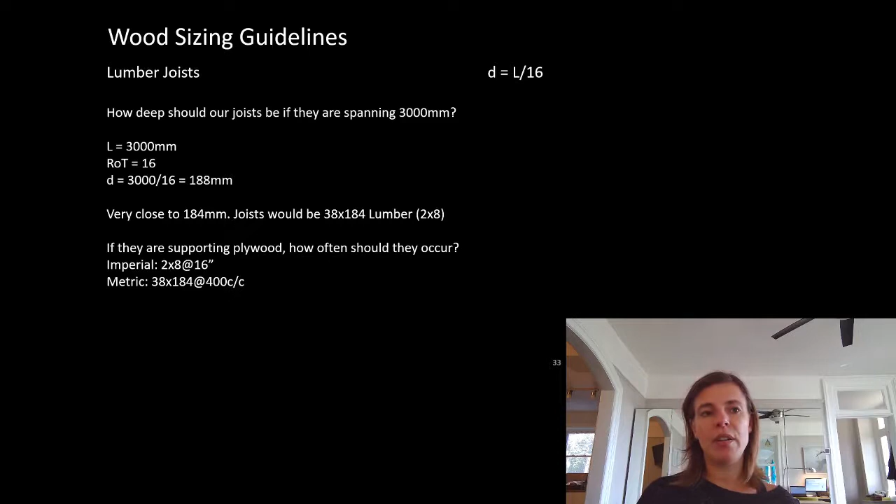Engineered I-joists, let's take a look at those. I've listed kind of what some of the sizes could be there. There's actually a mistake in that. That's slide 34. One of these has a typo, I believe, in the kind of available size there.

So these ones, they're not the first choice we'd go with. We'd put them where we just need things to span maybe a little bit farther. So how deep should I-joists be if they're spanning 7 meters? Remember, our 2x8s spanned about 3 meters, and that was pushing it.

So we have 7 meters. Our sizing guideline is 18. So 7,000 divided by 18 gives us 389. Well, we didn't even have 2x material that was that deep by any means. So this seems closest to the 406 millimeter I-joists, so the ones that are 406 millimeters deep. So we would want 406 millimeter deep engineered I-joists.

And we know they must be how far apart? 16 inches on center, because that's normal. Maybe in final design we'd find out something else, but normal is 16 inches on center.

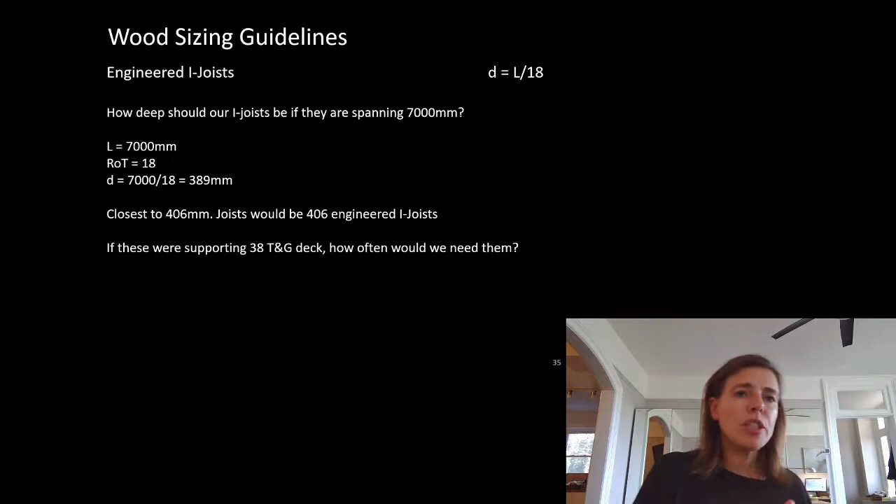So the question here says, what if they're supporting 38 tongue and groove? How often would we need them? Well, we know that this means we probably need them at 1.6 meters on center. So that would be fine for the tongue and groove.

But what does it tell us? It seems like this might be a little bit funny. Maybe we wouldn't have wanted to go with this depth, because we know this should be telling us they're every 16 inches. I'm not comfortable with this one. I think I'd go back and change the math on this one. In fact, I think I'm going to after this year's lecture.

So you can see here that I actually did write 406 engineered joists at 16 inches on center. So I recognized this issue at one point, but didn't change the question here. So I'm going to change that because I don't like that. We're going to assume that this is supporting plywood, which would be the more normal situation here.

Plywood, this is slide 35. I'm going to change that to 3/4 inch plywood. So when you see this, you're going to see this saying 3/4 inch plywood instead.

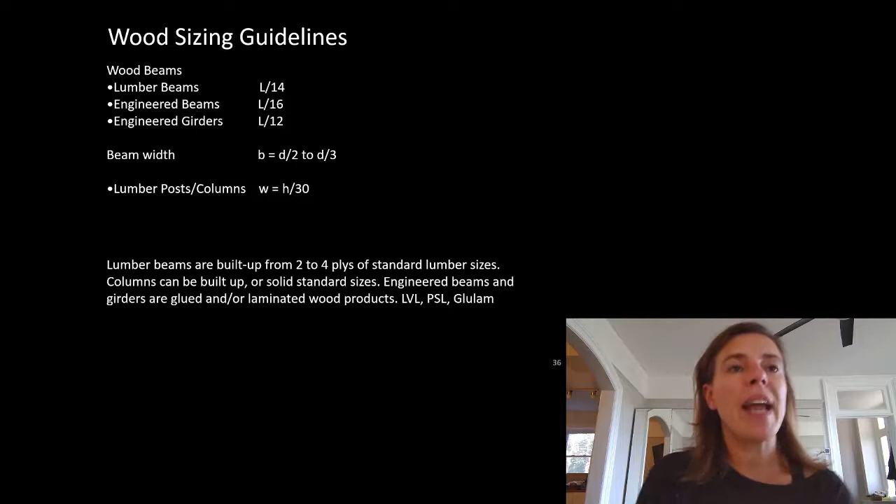Wood beams. Our cheapest is always going to be starting with regular lumber, so that would be something with a built-up section with our 2x material. We wouldn't go less than 2 ply. A ply is one 2x whatever. 2 plies, we've screwed 2 of them together. A 3 ply, we've screwed 3 of them together.

Lumber beams have a sizing guideline of L divided by 14. They'd be something picking up our joists or our I-joists. Engineered beams would be our PSL or LVL, with a slightly better sizing guideline of L divided by 16. If we know the beam is working extra hard, we might switch to calling it a girder, just because we know it's doing something kind of extra difficult.

Beam width is a pain in the butt. I hate talking about it, but it's helpful because it helps us guess what to draw. The width can vary between D divided by 2 to D divided by 3. You're going to see that if you draw it, you're going to have a pretty good idea of what you expect it to be. For a beam, it's probably not going to be square. Again, you intuitively know this. We're going to do the math next term about why that's the case. But a beam doesn't often end up being square.

Do you use the number you calculated? Do you use the number you rounded up to? Do you use the metric number or the imperial number? So if we calculated we needed something 180 millimeters deep, do we use the 180 or the 184 millimeters because we know it's a 2x8, but we're talking about it in metric? Or do we use the 203, which is the 2x8 in imperial, where we actually would use 203 possibly for the calculation?

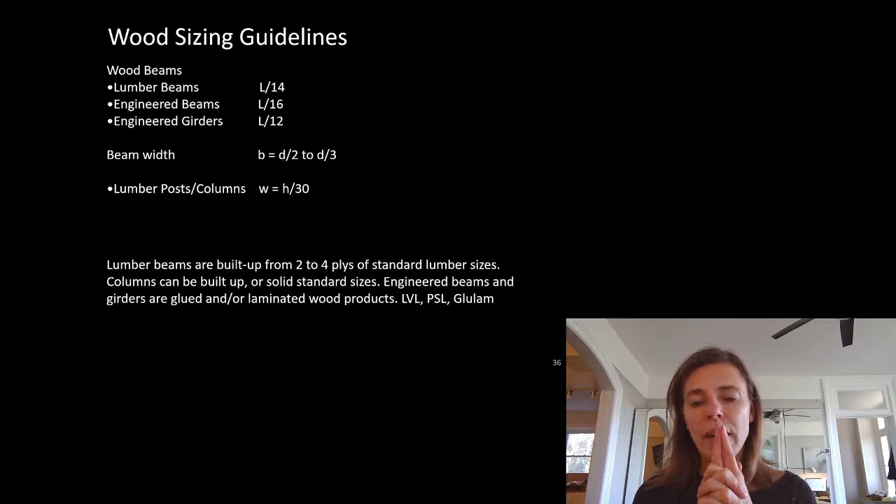The answer is, I don't know, it kind of varies. I can tell you that if I gave you a calculation, possibly on the assignment, there would only be one of all of those variables that would be an option in the multiple choice. There might be other options in the multiple choice, but they wouldn't be ones that you could calculate as possibly being right. I would make that at least the case for you. It's not to say there couldn't be other options, but only one of them will be in the given list of options that you can select from. None of the other options would be something that worked.

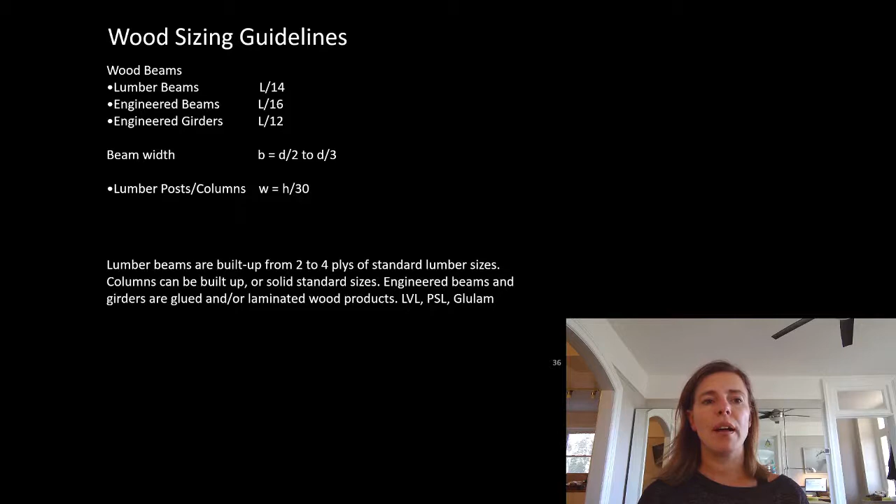So our lumber beams are from 2 to 4 plies of standard lumber sizes. The columns can be built up or solid standard sizes. Engineered beams and girders are glued and laminated products - so our LVL, PSL, and maybe our glulam.

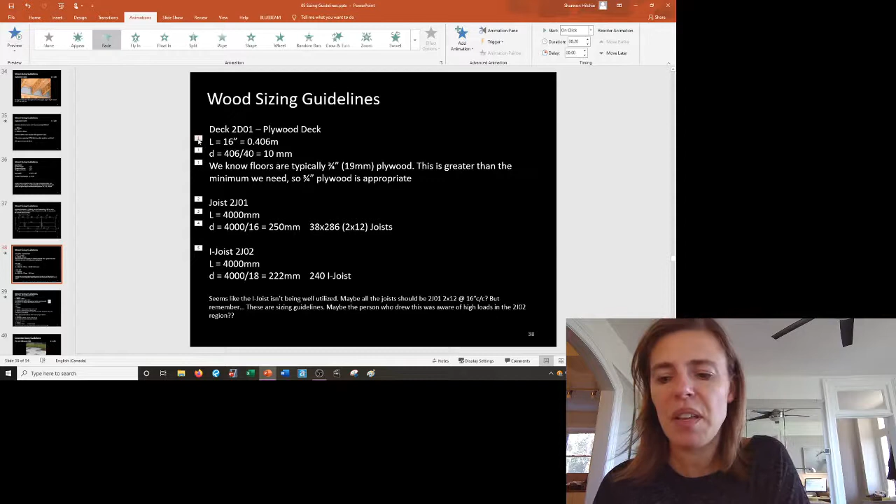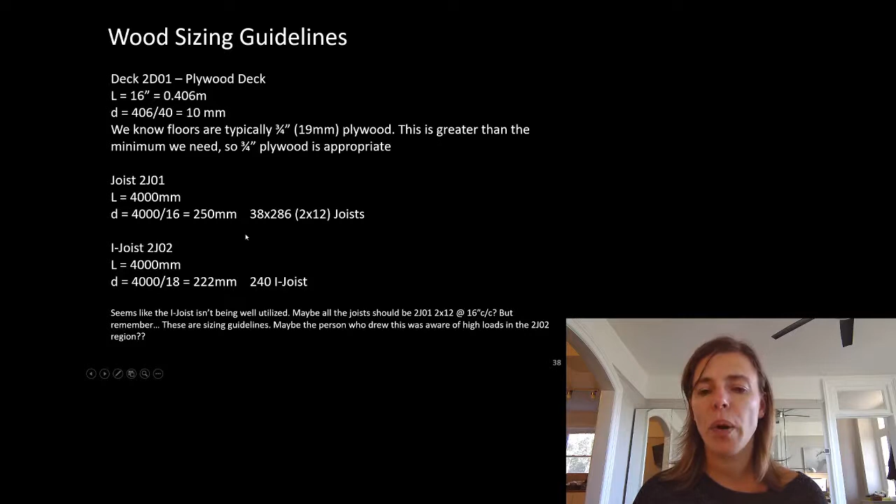2J02, we want to size as an I joist. So it's spanning the same distance. We've got 4 meters divided by 18 gives us 220 millimeters. We want to pick what I joist works, and from the list of I joists, 240 was an option. So we can use a 240 I joist.

Seems like there's... I'm gonna clean up some of this.

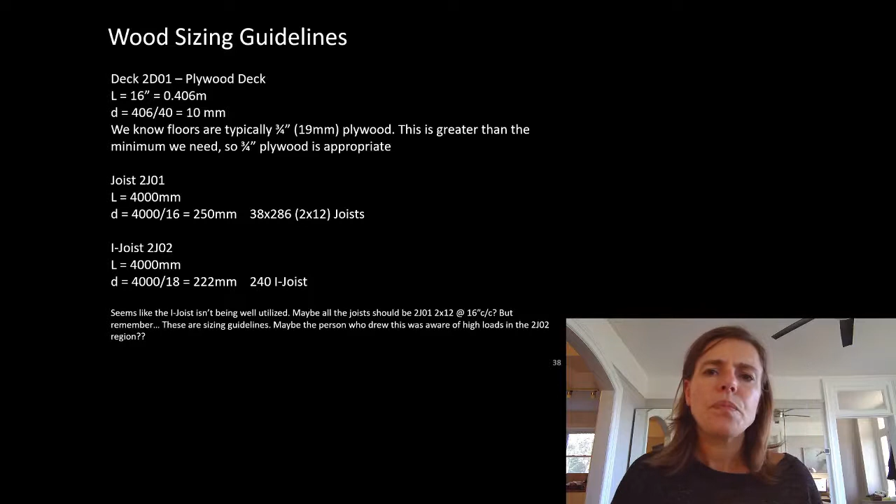So we'd want to really think, is it worth using the I joist? Is it worth making that switch? My guess is that the 2x12s are probably a great choice, but maybe looking at the drawings, we know that there was something going on there. Maybe that in that region we needed more headroom. There's probably a good reason there.

I hate these animations. Okay, so let's just put everything out on the table here.

2B01. First place we want to start is regular lumber because that's the cheapest. We saw that 2B01 spanned 4 meters. We get 4 meters divided by 14, which is a regular lumber beam, gives us 286. Well, 286, that's the size for the 12-inch deep members, which is really 11 1/4 inches deep. Well, if we look at the width guidelines, it's somewhere between 2 to 3, or a half to a third of the depth, which is 143 to 95 millimeters wide. Again, these are very loose guidelines for this.

2x12 members are 38 by 286. 3 plies would be 114 by 286. Seems reasonable because we don't know where in the half to a third rule we're kind of falling into. If we knew that this was heavily loaded, maybe we'd bump that up to 4 plies, but 3 plies seems reasonable. Do you use the 12-inch or the 286 to calculate that? Kind of depends on the mood. But looking at this, I think I'd use 3 2x12s to span that distance. So each one of those 2B01s would be 3 2x12s screwed together, kind of looking just like that image there.

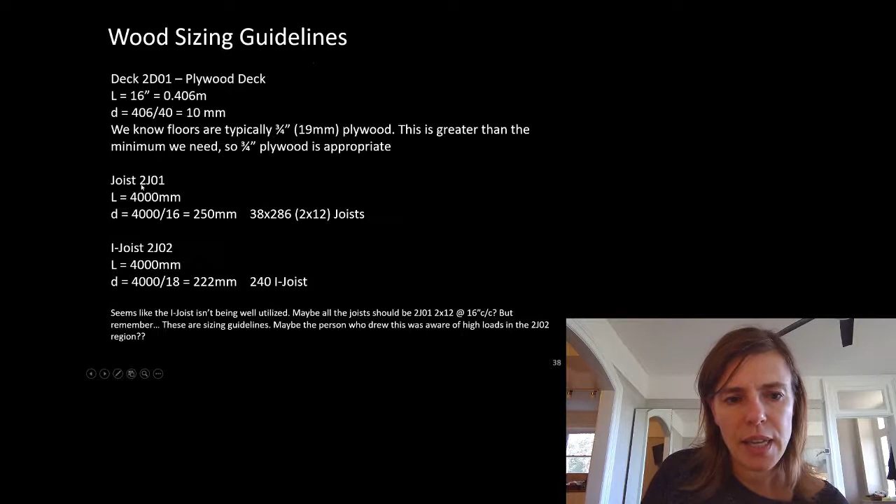My drawings have not... this is not the right drawing here, guys. I thought something seemed funny with this drawing. It did not update properly. So you guys are going to see a different plan here than what I'm talking about right now. The image did not get included in the file that I am looking at. It looks like it shut down before it's saved.

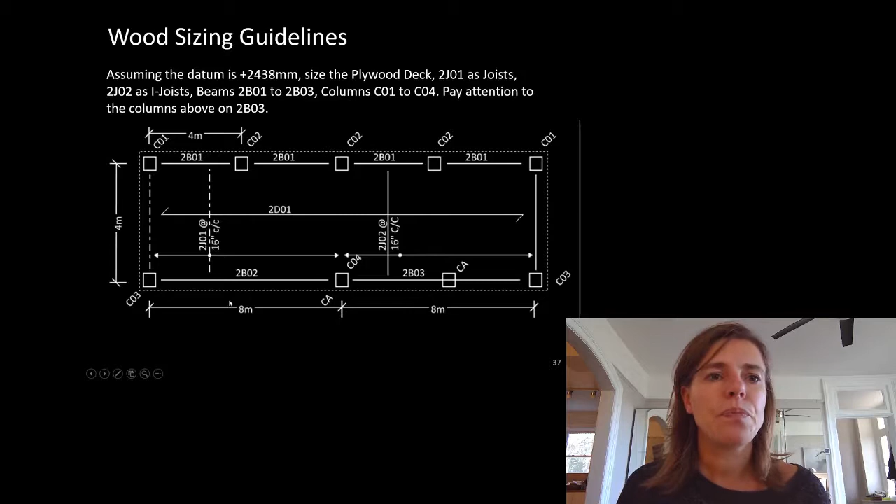There's some adjustment here where this is actually 5.33 meters. So you guys are going to see that, and the calculations are going to be kind of aligned with that. Our length will be 5.33 meters divided by 14 gives us 380. There's no regular lumber that deep, so it seems like we're out of luck. We can't use the cheap, easy option.

Let's go and look and see if there's an LVL or a PSL that could work for us. We would say, all right, it's the same span, but now we get to use L divided by 16. We get 333 millimeters deep. So both PSL and LVL come in a 356 millimeter deep member.

So again, for the width, do we use the 333 or the 356? Do you divide by 2 or do you divide by 3? Again, some of that depends on context. This sizing guideline for width is crap. It's more about drawing something that looks reasonable. I'm going to use the 356 and I'm going to divide by 3. I get 119. Well, that tells me I should use 3 45 by 356 LVLs or 2 68 by 356 PSLs. That would be a pretty good assumption in a preliminary design.

Our girder, which is the one with the column above, so this is our 2B03, spans 10.67 meters, and it's got a column at the midpoint of it above, or somewhere along it above. We just know that that's not going to have anything in regular lumber. If our 5-meter one didn't work, there's no way we're going to get a regular lumber to work.

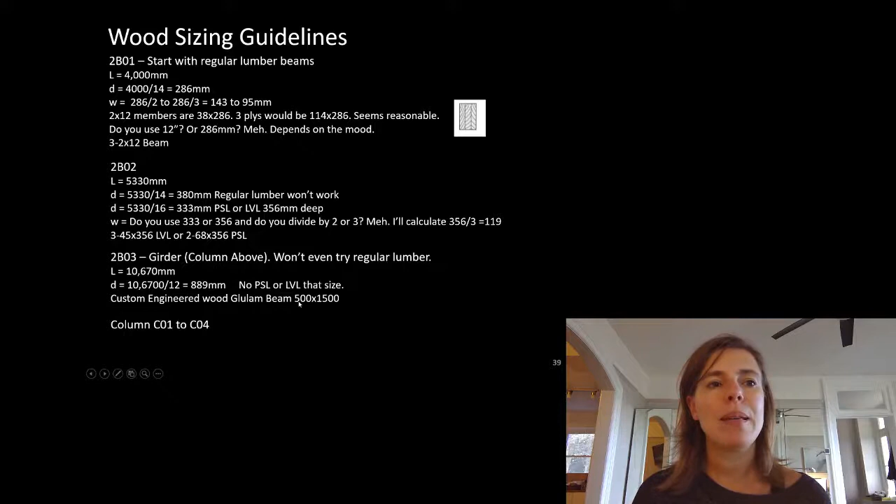We've got 10.67 divided by 12 gives us 889 millimeters. There was no PSL or LVL even available in those member sizes. We'd be reluctant to do it, but maybe this project has the appetite for it, that we'd want to look at a custom engineered wood glulam beam. So maybe something that is, again, this is all kinds of weird stuff happening in this.

Glulam beam, that's a weird size for a glulam beam. That's going to show a better size for you guys there because our depth was 889. I haven't even given you all of the range of glulam sizes. I don't want you to have to get into that. That seems a bit kind of over the top. I'm just going to make the note here that a glulam beam would probably be a really good choice.

So column C1 to column C4, our height is 2.44 meters. The sizing guideline is height divided by 30. That would calculate 82 millimeters. They did tell us that we'd need at least 2 plies for a stud or a post, or we'd want to use a solid 4x4.

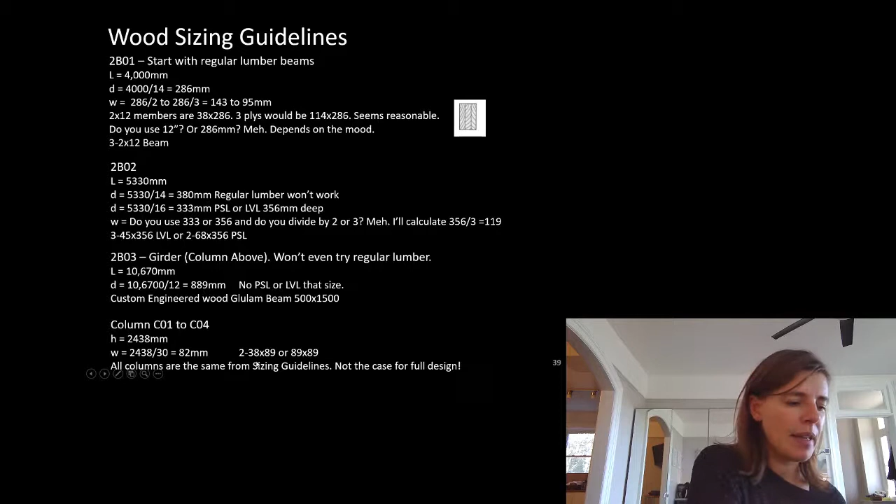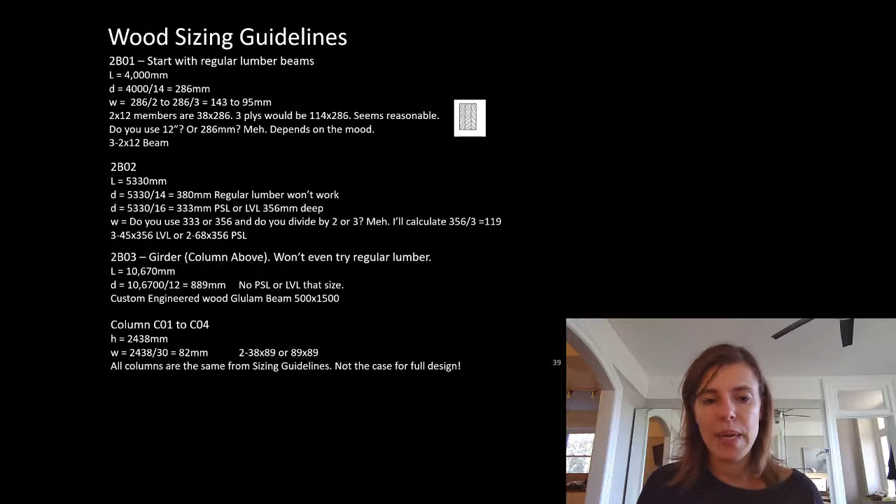I'm going to pause it right here and I'm going to thread these videos together for you guys. I want to go fix all of those things right now.

Okay, let's keep going with our concrete sizing guidelines. We're going to start with one that actually doesn't get used in concrete buildings, but it's a concrete material. We often use it with steel buildings or with masonry buildings. And this is hollow core slabs. They're concrete planks that have extruded holes in them, and we talked about that earlier in the course.

And they come in 200, 250, 300, and 350 depths. 200 and 250 are the most common. You would often use the other sizes if you had, actually you can even get them in 150 as well. So I'm going to add precast 150 to the list.

Hollow core, you would only use those kind of weird, less normal sizes when you were already using hollow core for the whole project and you needed those ones explicitly in certain regions. You probably wouldn't do a whole project with 150 hollow core, it just wouldn't be that economical. But if everywhere was 250, but you had a couple spots with headroom that needed 150 for one single bay, that's where it might become really economical to make that switch.

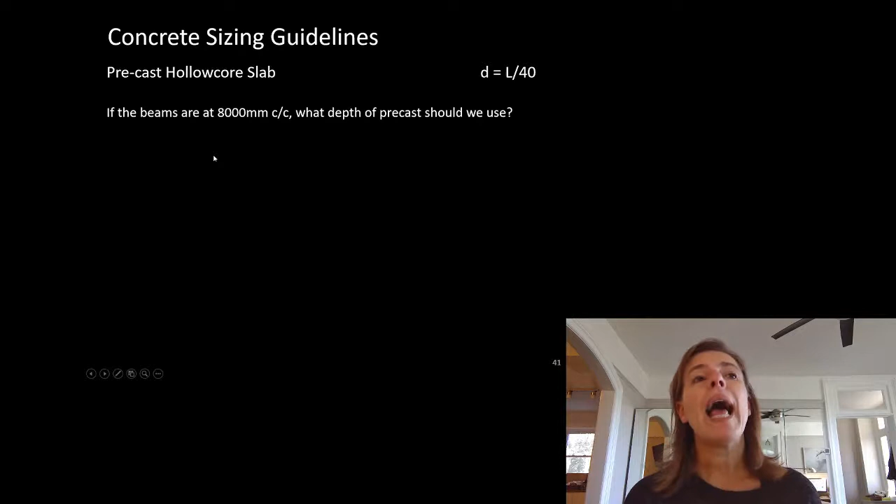So if we had beams that are 8 meters center to center, what depth of precast should we use? So we have some grid spacing that has major beams every 8 meters. For the most part in the building, what would be a good precast depth to use? Well, our sizing guideline is L over 40, so we take our 8 meters divided by 40, and that's going to give us 200 millimeters as an appropriate precast depth.

So like I said, it comes in 150, 200, 250, and 300. Sometimes you will see those listed in imperial. If so, you could use that, but we're going to stick with the metric here.

It really depends on what supplier it is. Sometimes one supplier will have two different pamphlets. They're often actually made at the imperial depth, even though their pamphlets say that they are the metric depth. So we had a project once where the architect was very upset about the extra 4 millimeters once they got to the project. I think the 4 millimeters are probably well within the tolerance of construction of a building, but I just want to be clear that they're often made at the imperial. I don't want to say always, because sometimes they're not. Some fabricators do it differently.

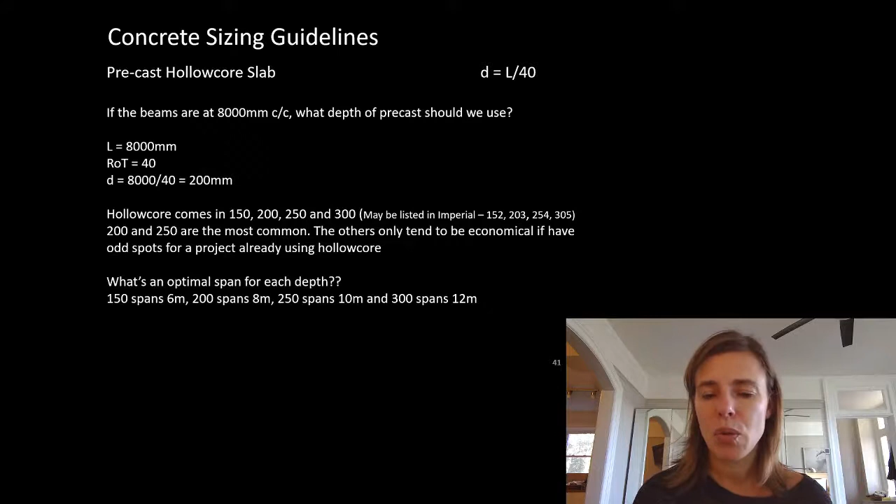So what's an optimal span for each of the depths, assuming we're talking about the normal ranges of ones? Well, a 150 can span 6 meters, a 200 can span 8 meters, a 250 spans 10 meters, and a 300 could span all the way up to 12 meters for us. Those are really the norms that we would go with.

One-way slab. A one-way slab is a cast concrete slab. So we put formwork on the bottom, we put rebar in, we pour in our liquid concrete, we let it cure, and then we take our plywood away. One way is when it's spanning from beam to beam, very similar to our hollow core. So it's doing the same thing as our hollow core, but the difference is it's cast integrally into our beams. So our one-way slab and our beams usually kind of get mixed in together a little bit here.

The sizing guideline for a one-way slab is L divided by 18. Again, we would often cast these in increments of 50 millimeters. So if I ask you for something in the assignment, I am looking for 50 millimeter increments.

So how deep does a one-way slab need to be if we're spanning 4 meters? 4 meters divided by 18 is 222 millimeters. So a 250 cast-in-place concrete slab is a really good option. 200, 250, and 300 slabs are normal one-way slab depths in Ontario.

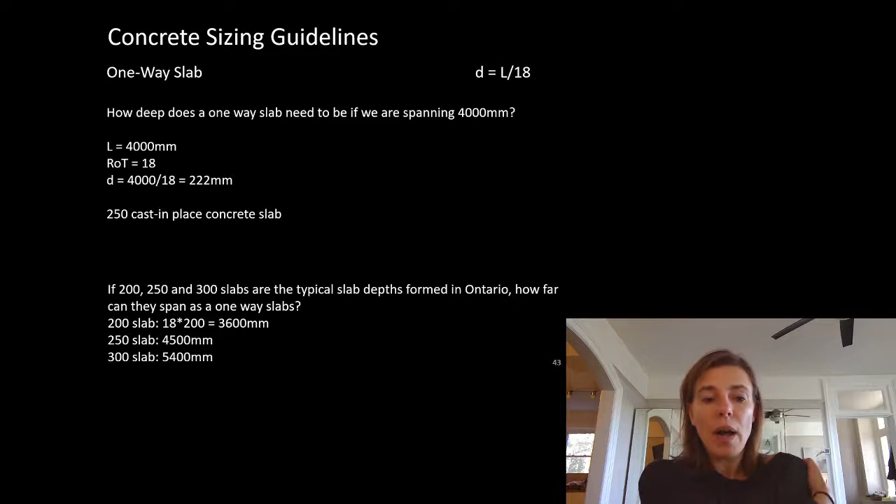How far would they span? For a one-way slab, depths are often 200, 250, and 300 in Ontario, or what we normally cast. So how far can they span when they're a one-way system? Well, our 8-inch or our 200 slab is going to span 3.6 meters. Our 250 slab is going to be able to span 4.5 meters, and our 300 slab is going to span about 5.4 meters. Remember, our hollow core was able to span quite a bit further than that.

Two-way slab. A two-way slab is when our slab can share its load out at each of the corners or at each of its sides. So I'm going to draw a little diagram here. I'm going to draw 2 of them for you. And I'll show you why, if a two-way slab is so much better, why we can't just use two-way slabs all the time. So if this is the diagram, this is a two-way slab.

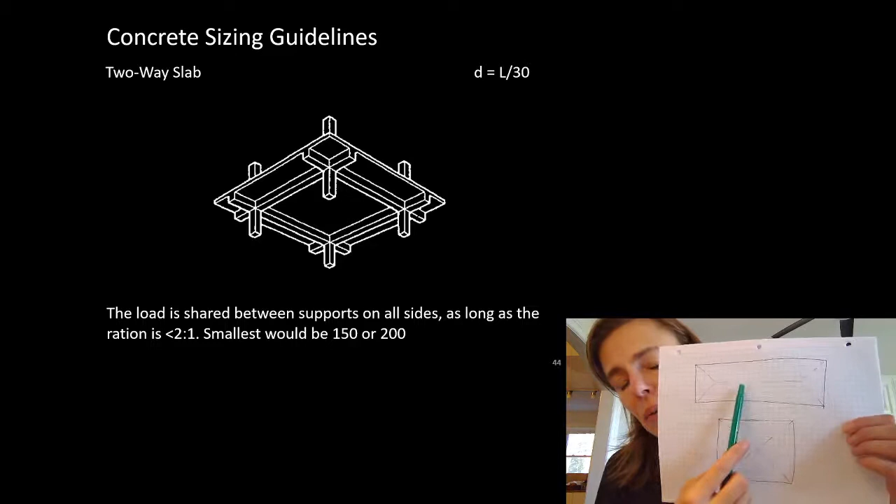What we're saying is that everything in this triangle is going to that beam. Everything in this triangle is going to that beam. Everything in that triangle is going to that beam. If we stretch out the proportions of that, this tributary is going to this beam, this tributary is going to this beam, these beams over here aren't doing that much. This, just by default of where the load goes, is actually a one-way system. So it's not that we're just picking, we're not just saying, I want to make it a two-way system. You have to pay attention to what the dimensions are. If you don't have the dimensions of a two-way system, you don't get to use a two-way system.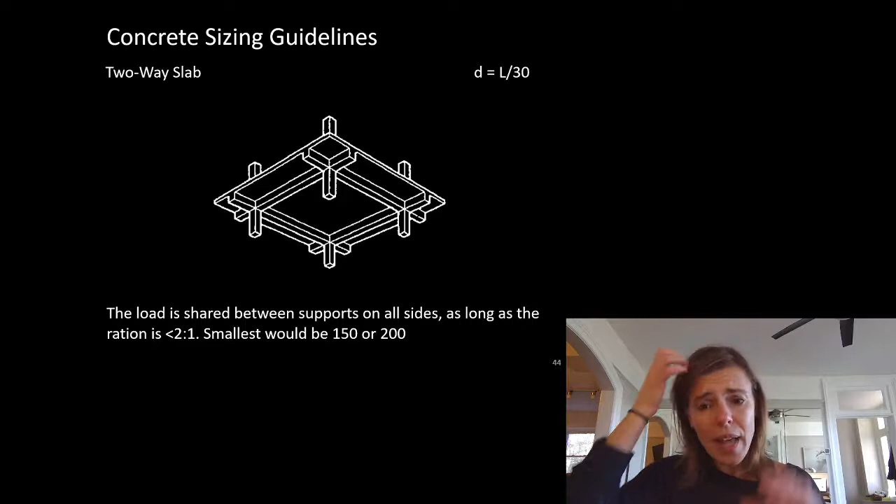So you can tend to use a two-way system if your proportions for your sides of your floor are less than 2 to 1. As you stretch that out, you could have the long dimension be twice what the side dimension is, and you'd still get the benefit of a two-way slab. Your smallest depth would be 150 to 200, but it's probably going to be the norm to be 200, 250, and 300 for your normal two-way slab systems.

So our sizing guideline for two-way slabs is L divided by 30 millimeters. So how far can we span if we're 8 meters? 8,000 divided by 30 is 266. So for that particular two-way slab, a 300 cast-in-place concrete slab would be a really good choice.

If 200, 250, and 300 slabs are the typical slab depths that we tend to make, how far can each one span as a two-way slab? Well, we can have 6 meters for a 200 millimeter slab, 7.5 meters for a 250 slab, and 9 meters for a 300 millimeter slab.

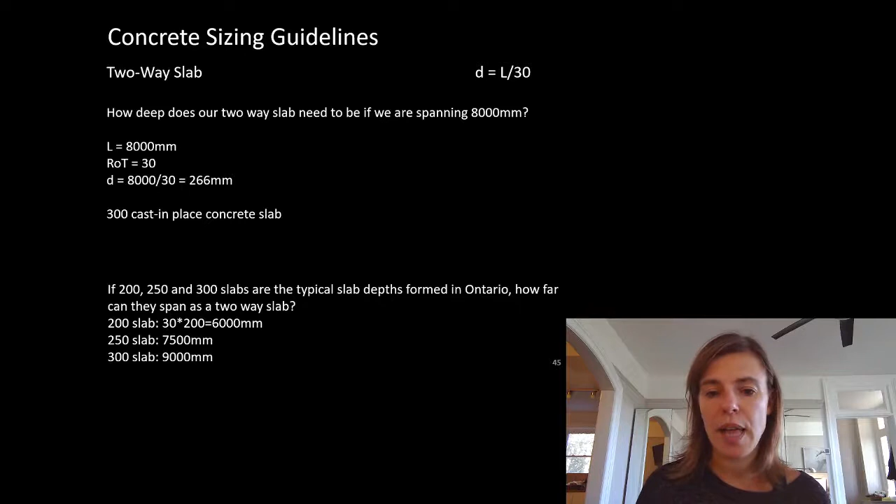Concrete beams have a neat aspect in that they can be cast as part of the slab. If this depth here is our slab, the beam we get to use gets to be this whole depth.

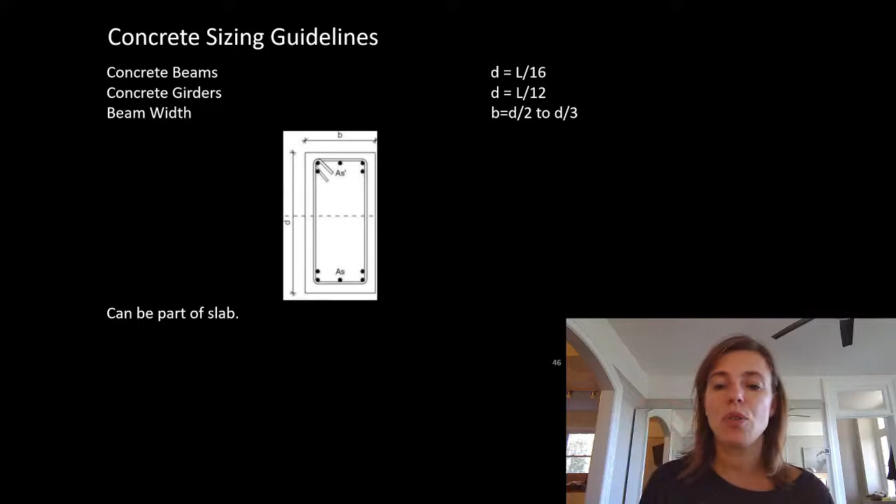We can actually include the depth of the slab when talking about our beam depth. So concrete beams are L divided by 16. A girder, which is a beam doing a bit more work, would be L divided by 12. Beam width is a totally loose guideline - I'm not going to expect you to do anything crazy with that. If I made you calculate, I'd only give you one option that worked within that range. The cool part is it can be part of the slab, so pay attention - am I talking about how deep it can be below the slab, or its total depth? So concrete beams, girders, and the width.

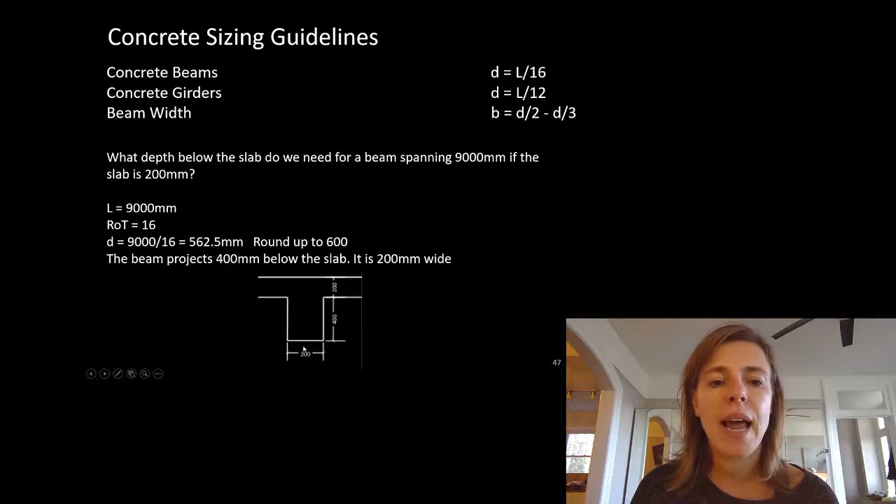What depth below the slab do we need for a beam spanning 9 meters if the slab is 200 millimeters? We have 9 meters divided by 16, so 562.5 is the calculation. We round up in 50 millimeter increments, so we go to a 600 millimeter deep beam. We had a 200 millimeter slab, so the projection below our slab - since that full depth is our 600 - leaves us with a 400 millimeter projection below the slab. And if somewhere between a half and a third is a good width, I've drawn this at 200 millimeters wide.

Concrete walls and columns. A concrete column is h divided by 20. Concrete walls are h divided by 25. Again, they're custom made on site, typically in 50 millimeter increments - not required, but that's what we'll assume, especially at this preliminary stage. Walls would never be less than 200 millimeters unless it was a short, lightly loaded, very fancy high-end situation. But we'd be talking about 200 millimeter walls as a minimum for these things.

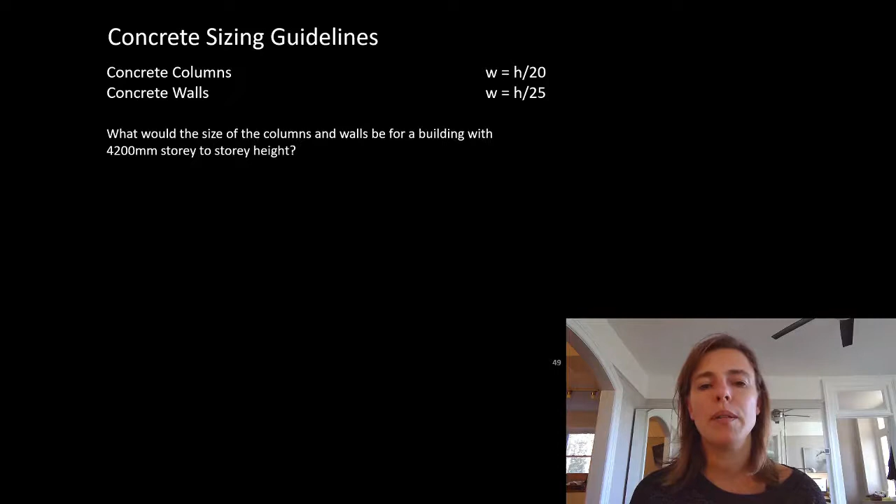So what would the size of columns and walls be for a building with a 4.2 story to story height? Our height is 4.2. Our rule of thumb changes from 20 to 25 depending on whether it's a column or a wall. Our columns could be 4.2 divided by 20, or 210, so we'd want no less than a 250 by 250 concrete column. Our concrete wall would be 4.2 divided by 25, or 168. We would round up to the nearest 50 millimeter increment, and I've said we wouldn't use anything less than 200 millimeters anyway.

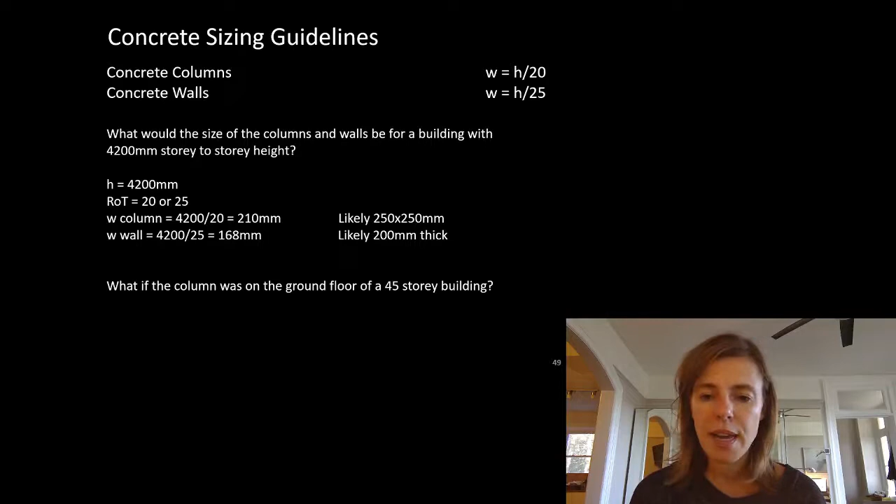What if this was the ground floor column of a 45-story building? You've been in those buildings - those columns are gigantic, they are not 12 inches by 12 inches. This is where understanding the context is really important. These sizing guidelines have no context, they're just assuming things are relatively normal and not that exciting. If you knew this was the ground floor of a 45-story building, you'd probably want to draw something a whole heck of a lot bigger than 250 by 250. How much? Couldn't tell you, but probably something much bigger.

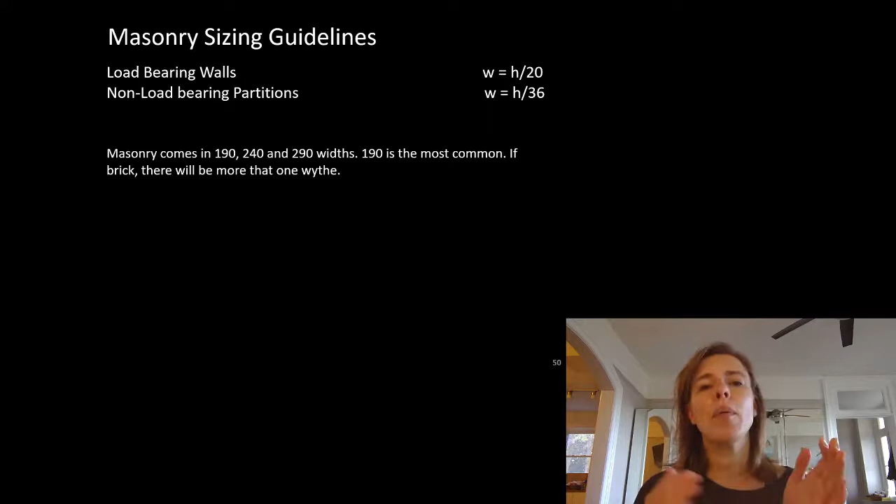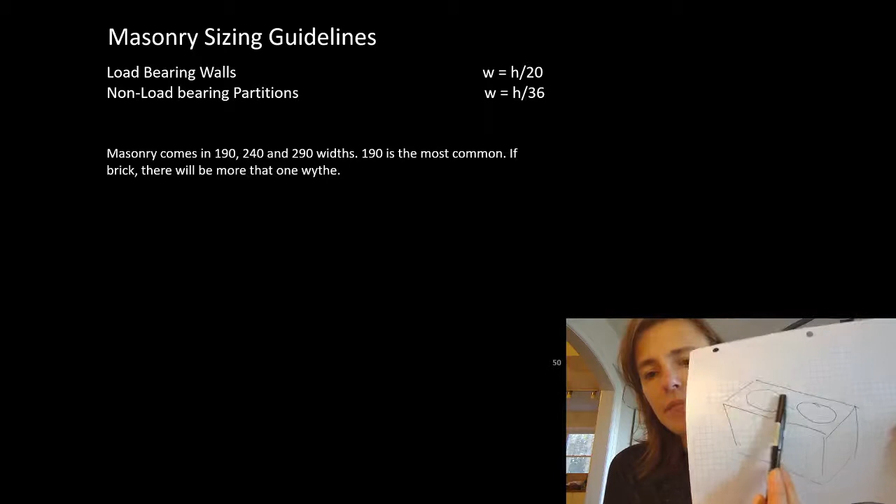Masonry - we're talking about brick or block. I'm more specifically talking about block here. You normally get it in... let me draw you a really bad drawing here. This is why I am not an architect. It looks something like this, where this distance right here is the width, and the length comes in different standard sizes. They have holes in it that we put rebar in, and we can grout it where we need to.

190 is the most common - you'll often hear it referred to as 8-inch block. They leave 10 millimeters shy everywhere to take up the grout. If it's brick and we're building up a wall, we would have more than one wythe, and every now and then there'd be one turned, binding those two wythes together.

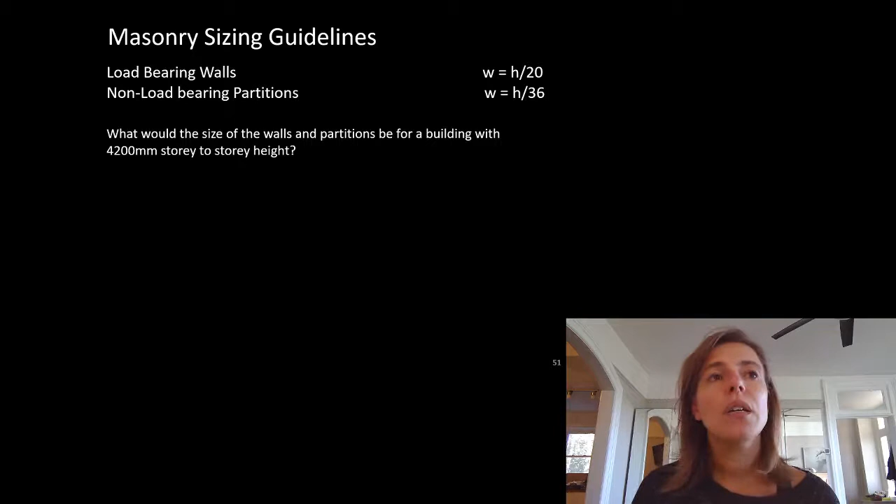So what would the size of a wall and a partition be for a building with 4.2 story to story height? If it's load bearing, meaning it's supporting a load, it's h divided by 20. If it's just a partition that's not bearing any load and just needs to be laterally braced into something else at the top, it can be h divided by 36. So a load-bearing wall, we would want to use 240 block, and on the same project, for anything that's not load-bearing, we'd want to use 140 block.

So what happens when it's a brick veneer? This is a really good guideline because architects draw brick all over the place without proper support, mostly because it's not taught anywhere.

Brick veneer, if it's starting at grade, can go up to 11 meters. Higher than that, it needs to be supported at every story, usually with a steel angle connected back to the main part of the building. Brick veneer is also laterally connected to the building so it can't blow around, every 600 millimeters.

So the last overall sizing guideline I want to give you is about a cantilever. When using the cantilever length, the rule of thumb would be half of whatever beam rule of thumb you were using.

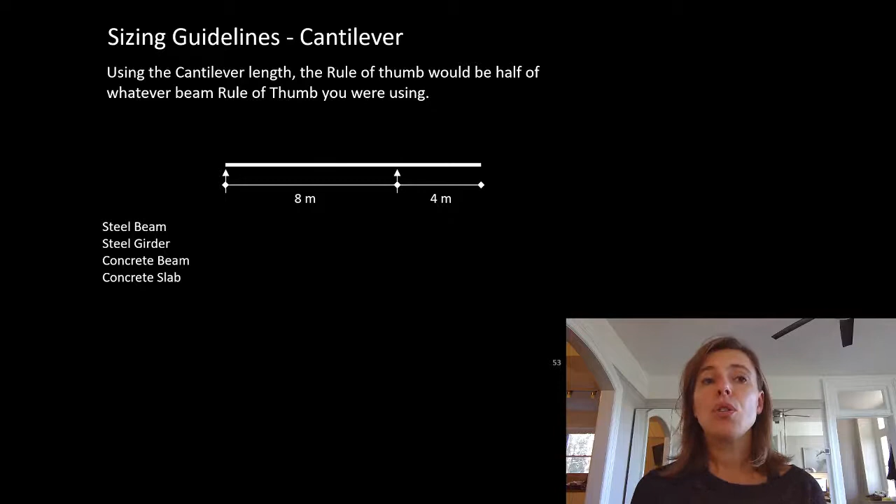So if I have an 8-meter backspan and a 4-meter cantilever, we know that if it was a steel beam, that 8 meters would be L divided by 20. If it was a girder, it was L divided by 15. If it was a concrete beam, it would be L divided by 16.

And let's say weirdly it's a concrete slab, that would be a really thick slab, but let's just talk about it as a loose application. We would use half of this length, not this length. We would change our sizing guidelines and cut them in half. You could do it either way.

So we take the length of our cantilever and divide it by half of the sizing guideline. You can see with an 8-meter backspan and 4-meter cantilever, we get the same depth. If these weren't exactly half of each other, we would not get the same numbers.

You want to make sure if this is one continuous beam that you use the worst case, or the deeper one. If this was a 5-meter cantilever, all of these numbers would have gone up and governed the depth of our overall number. If this was 9 meters and this was 4 meters, all of these numbers would have gone up and our backspan would have governed our overall.

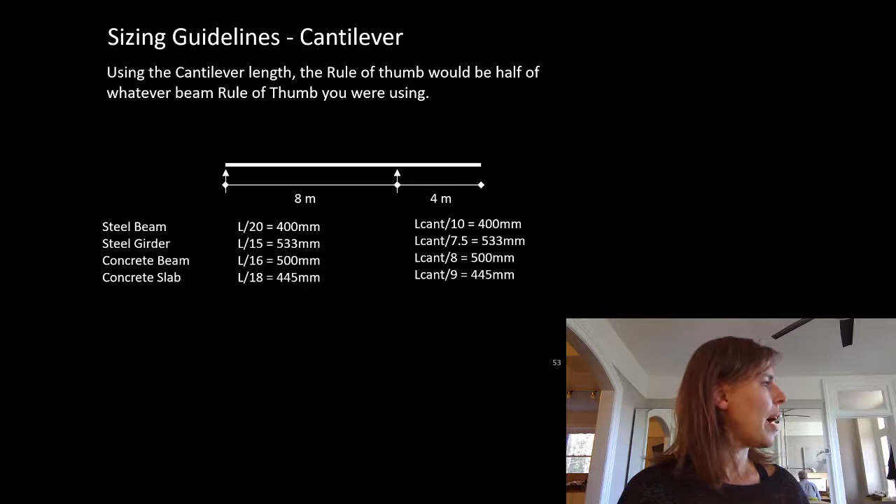I hear noise coming out of your phone. Oh, he's got headphones in.

So, last slide, takeaway tips. Sizing guidelines will help with preliminary sizing. They're not perfect—you've even seen in these slides talking points like, well, this would be slightly different, and this would be slightly that.

I've tried to be very crystal clear in the assignment questions I gave you. These aren't meant to be difficult. They're meant to be used as a place to start where you know what's weird beyond that. So if I'm giving it to you, it's normal, unless I tell you very explicitly it's something weird.

And so you should understand your constraints. Joists for wood are going to be at 16 inches on center. Open web steel joists and purlins are going to be at 2 meters on center.

Sizing guidelines are something you guys are going to want with you on your desk when you're still working at 100, because you're going to be architects. You're going to need to work until you're 100, let's face it. So you're going to want those with you because they'll be very helpful throughout your career. Engineers tend to forget about them because we start to rely on the math too much, I think. But the sizing guidelines can be really helpful.

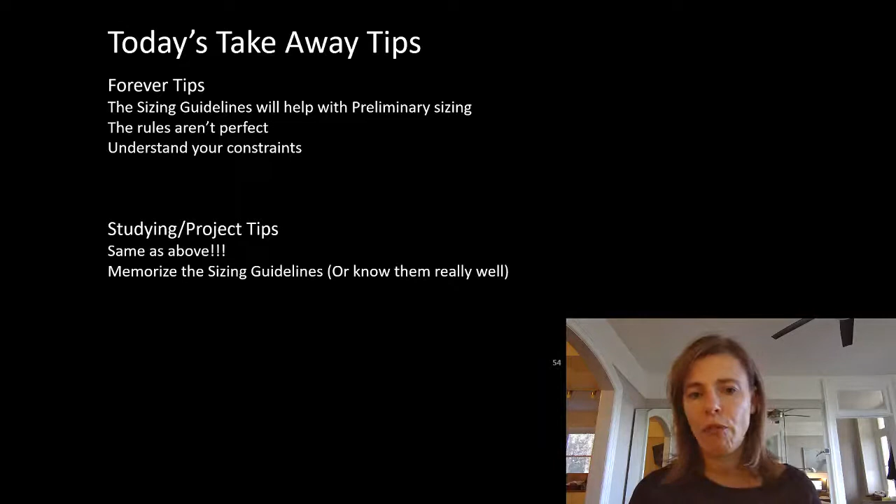Remember, a couple of the slides are going to have slightly different numbers from what I showed going through this presentation, so make sure you have the correct one open in front of you, because I'm going to go back and make those few updates to the lecture slides so you have the best information. Rather than re-record for a few small things, take a look at those lecture slides and look at them in tandem together. You might find that very helpful.